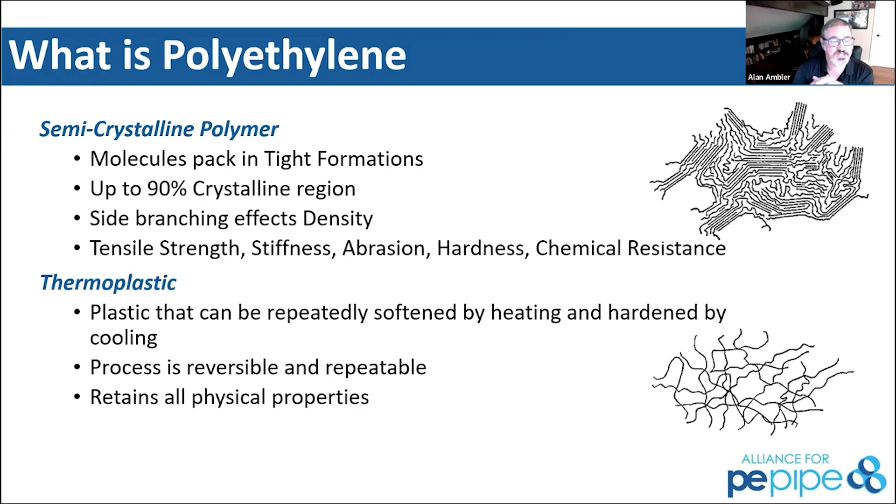What we'll see in polyethylene as this continues to go, it's kind of like chocolate. So as we continue to show you what happens, we are going to reform, melt that surface. In butt fusion, we'll push it up against and control the pressures to which we are putting those two surfaces together in that interface, allowing the molecules to run across that connection. What we're doing is allowing that integration of the polyethylene molecule to run through that connection and continue to form the bond we're looking for. That joint is exactly what we want, as strong, if not stronger, than the pipe material itself.

So what happens during this, if we fast forward through the entire animation, we'll see those two surfaces at rest. Then when we start to heat that surface up, all of those chains will disentangle and start to move across that surface. All this is hydrogen and carbons as we're moving through in polyethylene. It gets between that boundary as we continue to move across, and then as it cools, it will be as strong, if not stronger, than the pipe itself.

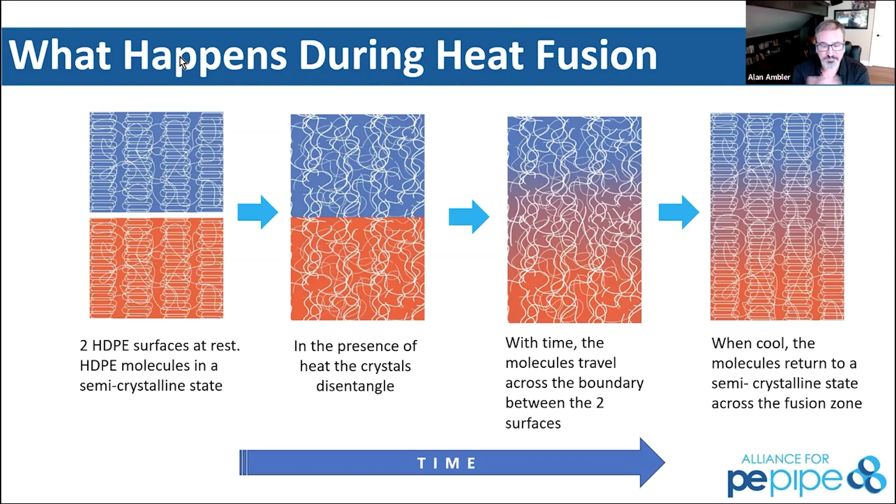So Jim, take it away. All right, thanks, Alan. That's a great overview of what we have there and how this works.

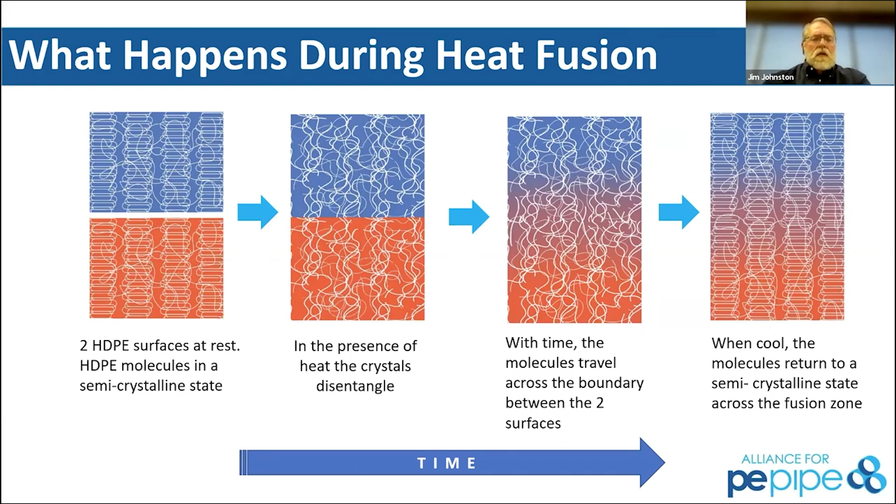Let's talk about the strength of fusion. As Alan said, the fusion process itself is melting the joint and bringing it together. In this case, we're showing the butt fusion process coming together, the molten zone bringing the two ends of the pipe together, and then reforming. Now we have a pipe that is as strong as the original pipe itself.

The steps to do a butt fusion are really fairly simple. You've got to make sure you do it right, but you clean and clamp the pipe, face the ends to establish a clean parallel surface, align the ends, melt those pipes together, push them together by applying force, and then hold them through the cooling time, very much like the chocolate analogy Alan showed. That same process can happen to a degree also with electrofusion.

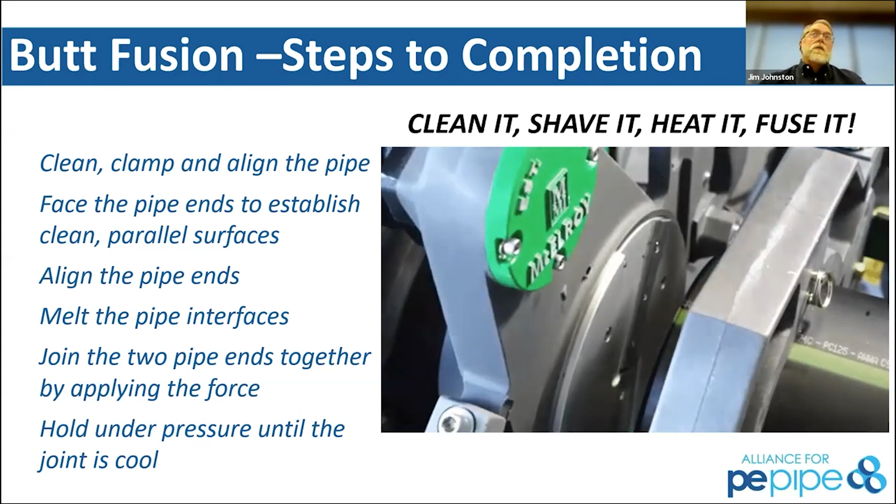And with that, I'm going to turn it over to Rick, if you'll come on and talk us through the process of electrofusion here, Rick. Can you see me there? Didn't come on? No, just do it without the video. If it doesn't work, we can hear you just fine.

Okay, obviously with electrofusion, it's going to require an electrofusion fitting. While it's a very robust fusion process, just as butt fusion is, it just utilizes a different methodology of getting there. We have to have the fitting, and clean peeled surfaces so we can get down to virgin material. The process will use the fitting to melt the pipe and the fitting. It's going to swell, creating contact at the interfacial area between the pipe surface and the fitting. It moves between the cold zones, and that's where the co-mingling of the actual molecules takes place. Then it cools down, and you have a very robust fusion joint.

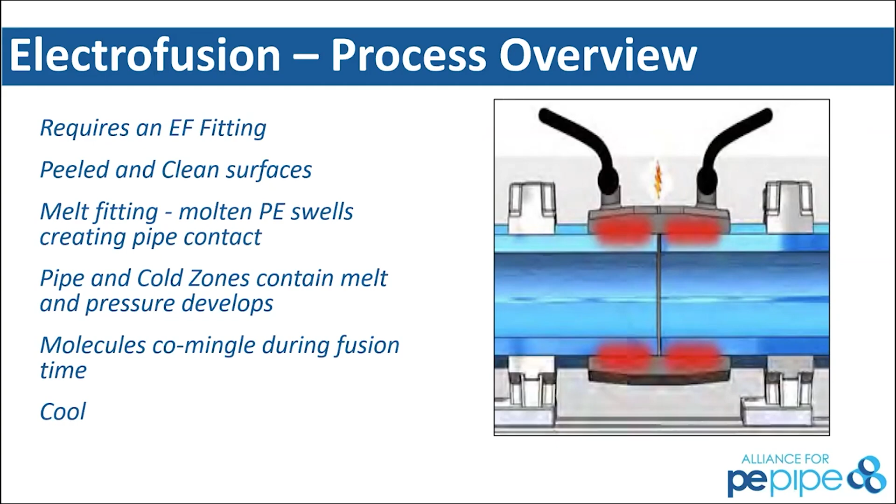We talked about doing the actual fusion. The methodology is with the electrofusion fitting. It has two areas: a fusion zone, where we have the wires, and the cold zones, where we don't have the wires. As the fusion zones heat up and begin to expand and move out to the cold zone, it dams up, builds the interfacial pressure, and then the actual fusion takes place, basically in the simplest form.

It's going to utilize an electrofusion processor, which we also call a control box. On all the electrofusion fittings, we have barcodes that allow us a universal way of inputting the fusion data. By scanning the barcode, the processor will recognize the fusion parameters that each fitting has, and put it into the process after you attach the leads and scan the barcode. We want to make sure the data on the label is confirmed with what you have on the screen. Then after you hit the start button, things are good to go.

And that's anything else there. That's it, Rick. Okay, thank you very much. You bet.

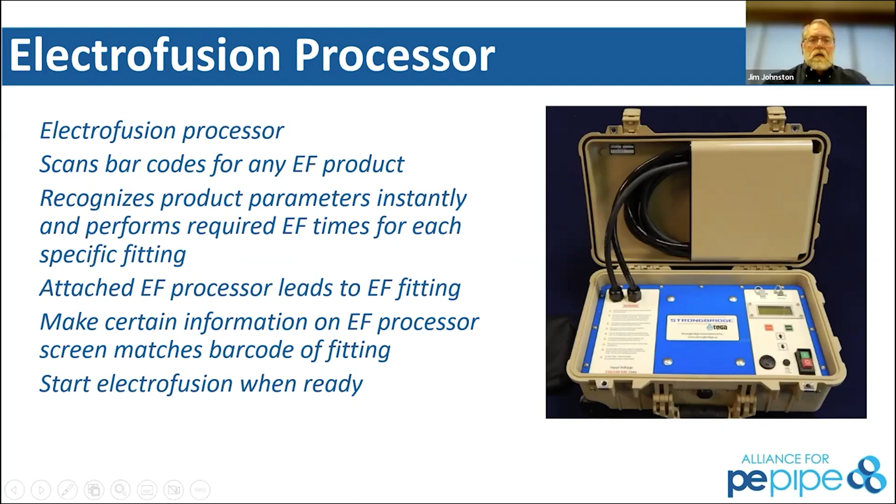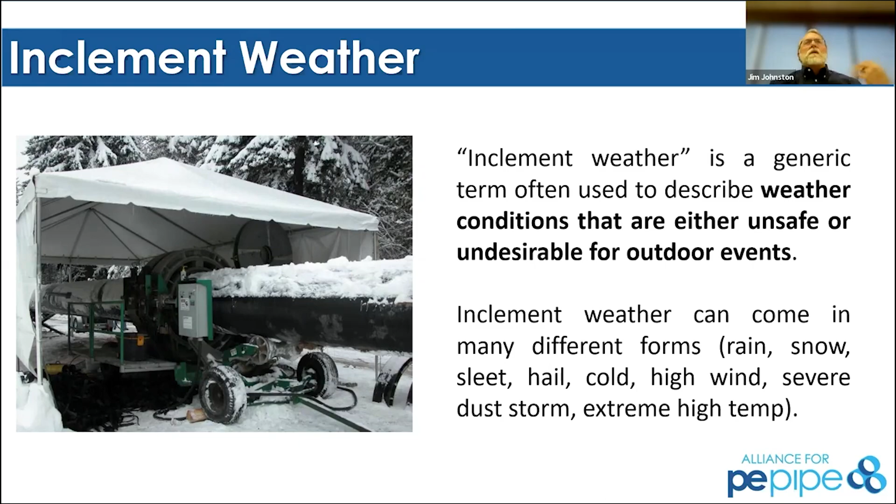With that, we're going to talk about, as the title of the presentation today is cold weather fusion, but we're going to talk about inclement weather generally. This really applies to any kind of inclement weather you may run into, situations where there could be contamination, water, other ingress into the fusion area, whether it's electrofusion or butt fusion. Doesn't matter what your process is, you shouldn't be doing any pipe fitting without some sort of protection. We're talking about generic weather conditions that are unsafe or undesirable - rain, snow, sleet, hail, high winds, extreme temperatures. We'll talk about situations in Australia this past year where we saw temperatures approaching 130 degrees plus out in the outback. Take those into account as we move forward.

With that, we always talk about safety. Chris, you've been on job sites - you want to talk a little bit about how safety impacts any job site we're talking about?

Well, okay, there's Chris. Sorry about that, forgot to unmute my mic there.

Obviously safety is going to be your number one priority on any job site. Polyethylene, when you're out there fusing it, doesn't have any other unique safety considerations compared to any other pipe. The big thing I'll tell you is in the cold, dragging and stuff like that on these job sites, you will see a lot of kinetic energy built up in this pipe. The colder it is, the stiffer it gets, and that becomes a safety aspect. Other than that, your safety priority is going to be priority number one, but at the end of it all, you're no different than any other type of pipe.

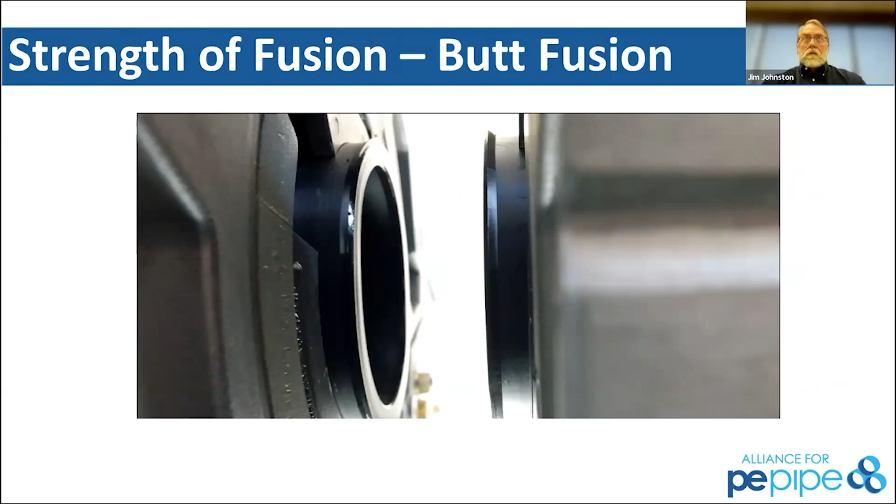Did my slides go haywire here? Yes, sir. All right, sorry, I've had a little bit of a failure. Hold a moment, please.

So Chris, you were saying that safety really doesn't matter what kind of job site you're on - whatever system you're doing, wherever you are, you should be following your safety protocols and handling that. That's even more important with cold weather. Yes, sir, the pipe is going to be a lot stiffer in cold weather. It's not going to take the impact resistance. When you're roping pipe around a corner in the wintertime, that pipe is going to carry a lot more kinetic energy throughout it because it's stiffer - it's not closer to a molten material at that point.

Chris, what are the three top ways a guy's going to get hurt on a job site with polyethylene pipe present? Loading and unloading is probably going to be the number one situation. You see more people get hurt when loading and unloading pipe. You've got to be sure first off that you're over the length of the pipe away from the end of it while loading and unloading. Second, you're not on the backside of a truck. I've seen more people in the field, drivers that aren't experienced when hauling this - they'll walk around the backside of the truck and a forklift will come in to grab a bundle of pipe, and off the backside goes a stick or two of pipe, or even a whole bundle. That's one of the biggest safety concerns out there. And when you're dragging this pipe, remember it has that stored kinetic energy in it, so when it comes around a corner, that tail, especially at the end, is going to whip out. Those are the two primary safety concerns I see in the field.

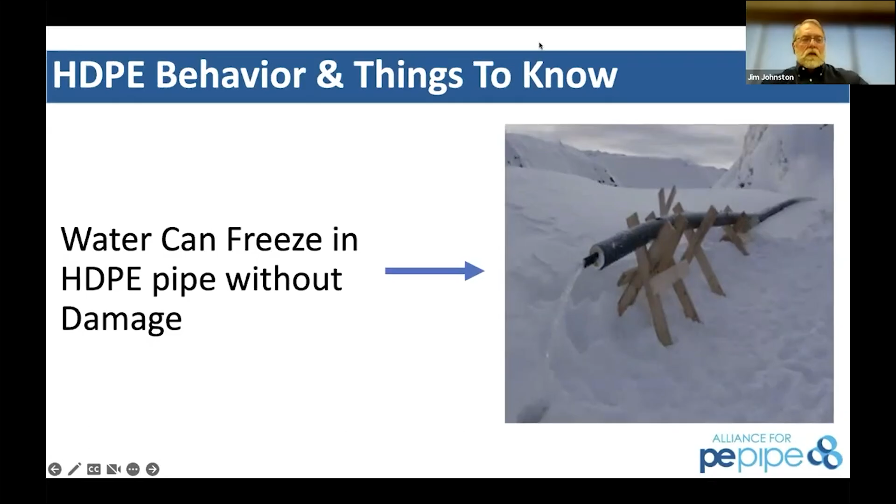Thank you. Are you seeing my slides back? Yeah, you're good. Okay, all right, sorry everybody. As we all know, technology some days is our friend and some days it's a challenge.

So as we talk about this, one of the things that's really key with polyethylene is that one of the great pieces of polyethylene and its advantages is that it can freeze solid without damage. So you've got a huge advantage here versus other entrenched materials that are out there that will just shatter as the pipe expands.

That polyethylene pipe has enough flexibility that it can freeze solid on the inside. That's a great behavioral characteristic and one of the great advantages, especially in cold weather situations. Even when the pipe isn't buried below the freeze line, it has the capability to survive that situation and do so without any damage at all.

We've also got some really good slides here. This pipe you're seeing on the line is actually insulated pipe. There's a carrier pipe in the middle where you see the water flowing, and around that is an insulation layer with another layer of polyethylene over the top. So you can have insulated pipe that keeps water flowing, not just freezing and managing that freeze, but continuing to move.

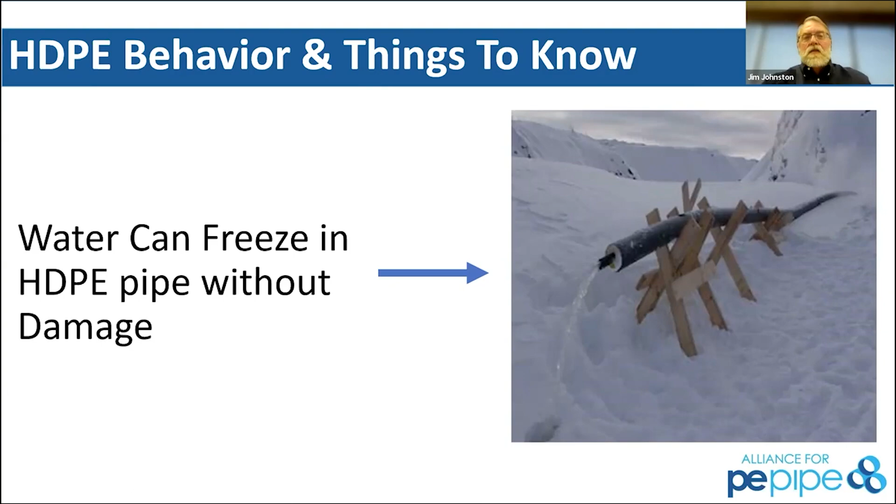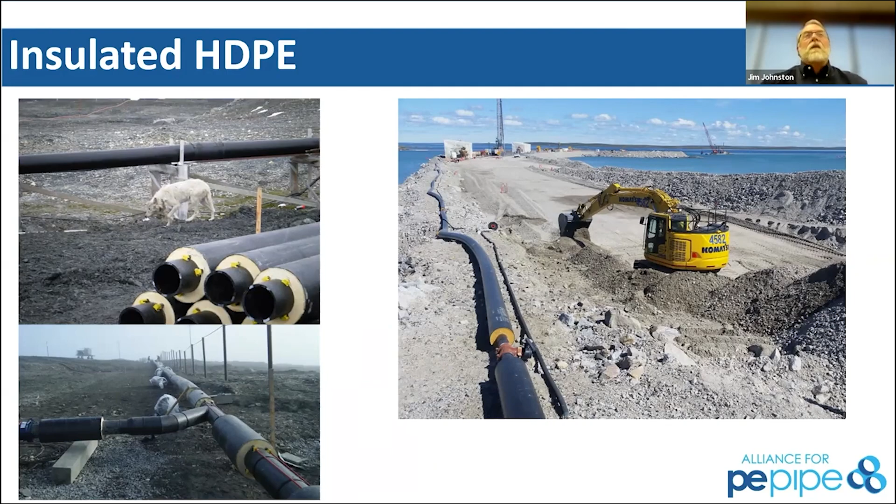Here's some other situations where you see that insulated pipe. When we join that pipe, whether by butt fusion or electrofusion, the insulation is stripped back from the end of the carrier pipe, and either electrofusion or butt fusion is done there. Then typically a wrap comes back over that exposed area to re-insulate that component, so now you have a completely insulated system throughout your process.

One of the other features you'll always see is using the tools available to help align the pipe. The beauty of polyethylene pipe systems, whether using coiled pipe or stick pipe, is you can have very long runs of pipe. You want to use pipe stands, lifts, rollers, and other components to keep that material off the ground so it doesn't get scratched, but also to help move the pipe into and out of the machine, minimizing friction.

The biggest key in this situation, with these productivity tools that McElroy offers, is setting your job site up correctly. If you set the job site up correctly and use the tools properly, the way they're intended to be used, it will increase your production, even in cold or extremely hot weather, and it will make your job site much safer. When you're out there just trying to hold up the pipe, fuse it, and drag it without using the tools properly, it makes your job site much less productive and much more unsafe than if you just took the time to set it up properly.

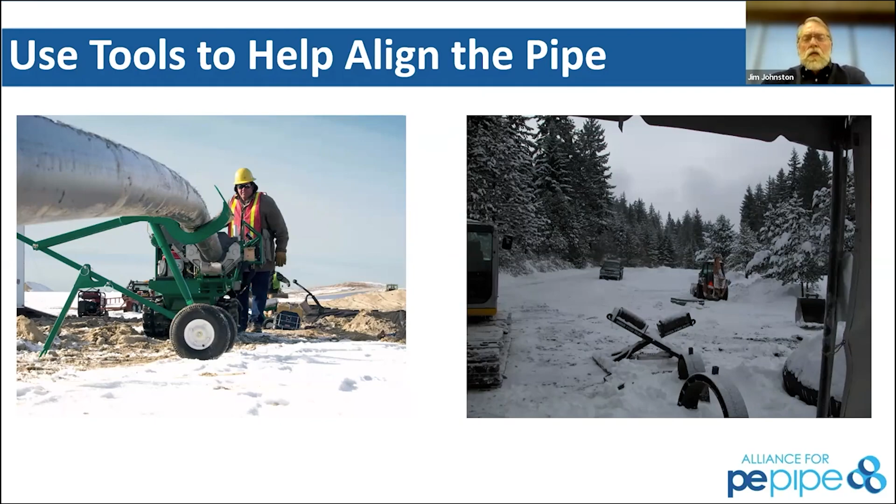So we've got a couple of examples of installations that are really great examples of cold weather applications and cold weather ultimate uses. The West Fork Upper Battle Creek diversion was a fantastic project in the state of Alaska. It was put in at the Bradley Lake Hydroelectric Dam, which covers a huge portion of southern Alaska. The reservoir feeding that hydroelectric dam was running low, and there's a glacier stream that was rerouted to continue on its current path, but at certain times be diverted to refill the reservoir.

It was 2.3 miles of 63-inch DR-17 pipe. For those not familiar, DR-17 at this diameter is roughly 3.7-inch wall thickness material. This was built literally up the side of a mountain going up a glacier. You can see the McElroy Talon going up that grade, fusing on the side of that hill up to an 18% grade. This was one of the toughest projects this machine has ever seen. This machine will do up to 2-meter diameter.

For this pipeline, the road was built, then the pipe was buried right into the side of the road, and the road was taken back out at the end of the project because it's on a national park. So, a very cold situation obviously in Alaska, but a great application for polyethylene that can be a long-term solution to maintain that hydroelectric dam in that area, and really a fantastic solution for HDPE.

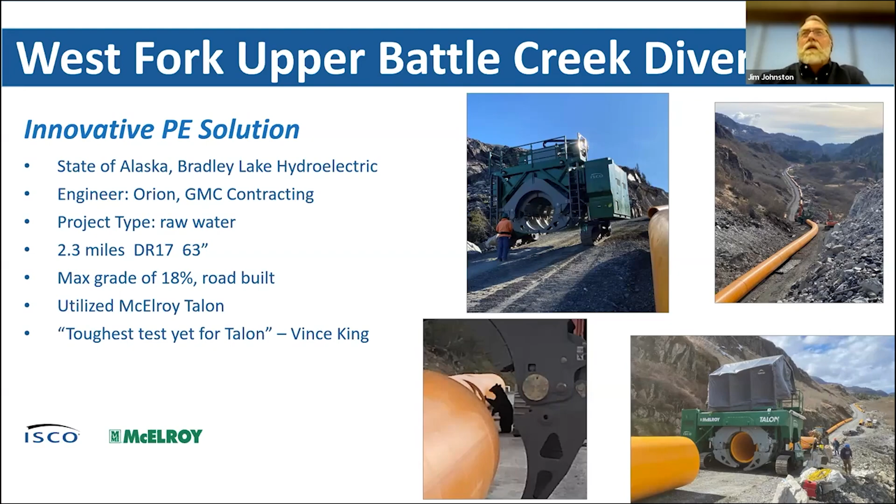And in the bottom right picture, you can see the amount of incline that goes up the hill, and the tie-in here at the bottom as they're doing sections as they go up this hill.

So Rick, if you would come back on and let's talk a little bit about normal operating temperatures. How do you process, and how do you do things? When we talk about normal operating temperatures, basically what we're talking about is the ambient operating temperatures when you're installing electrofusion fittings, where you don't have to make any changes to the standard fusion times or procedures. And electrofusion, that tends to range between 14 degrees and 114 degrees. Now, it can be fused colder, it can be fused hotter, but in those instances, we'd basically like to be called to find out what temperature range, just in the event we may need to modify fusion times or something like that.

Yeah, and on the butt fusion side, the standard basically says you should not be fusing below 5 degrees Fahrenheit. There's a lot of things that go there, and we're going to talk a little bit as we get further into this. You're going to hear me say a few times.

Chris, come on as well. Yes, sir. Me talk. Go ahead.

So to touch base on that statement that you just made, it doesn't mean that you can't fuse below 5 degrees Fahrenheit. It's not recommended to fuse below 5 degrees Fahrenheit without precautionary measures being taken. So it doesn't mean all of us up north have to shut our jobs down when it gets cold outside. So keep that in mind when Jim's talking about cold weather fusion.

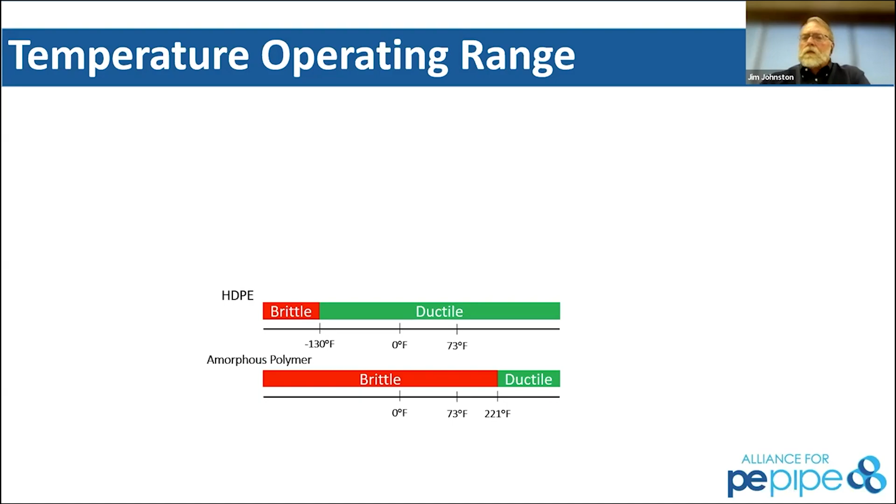Alan, if you're going to come on, talk a little bit about where we are with temperatures and operating ranges. Microphone. All right. Looks like we're having an issue with Alan.

So go ahead, Jim. The material itself, polyethylene itself, has a service temperature range ranging from -40 degrees, which is roughly -40 degrees Celsius, roughly, also to 140 degrees. That's your operating temperature for the material in process. You're going to have some applications where you're going to be hotter than that, but you're going to lower the pressure. The glass transition temperature, meaning when is this material going to fracture if I hit it, is minus 130 degrees Fahrenheit. Hopefully none of us ever have to see minus 130 degrees Fahrenheit.

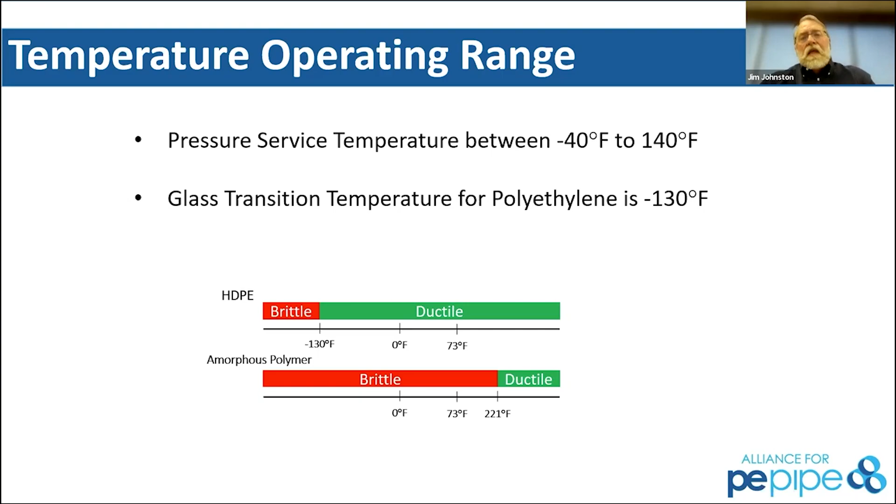But that means it's much more flexible. It has much more capability. If we were to look at some of the other amorphous polymers, which are not HDPEs, some of the other plastics that are out there, their brittle temperature, that glass transition, meaning where they become brittle to impact, happens at 220 degrees Fahrenheit. So they're brittle just sitting on the ground. So again, one of the other great advantages of using HDPE.

Thermal effects themselves, we actually see that polyethylene has a very strong thermal expansion rate. The rule of thumb is a very easy piece to use here, which is 1/10/100, meaning that it will contract or expand at a rate of 1 inch per 10 degrees Fahrenheit per 100 feet of section. Now that's unconstrained. It means if it's just laying on the ground, it will expand or contract at that 1/10/100 piece, but it takes a very much smaller force to restrain that, because the force of that expansion is much less than carbon steel or stainless.

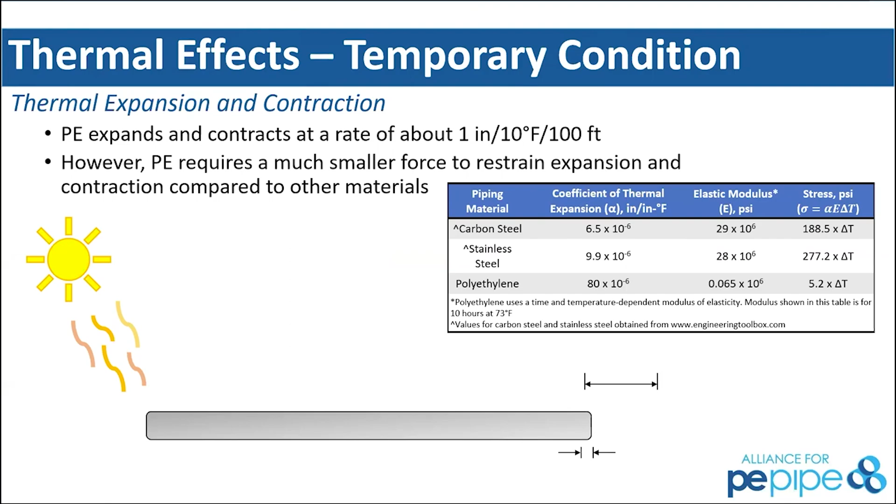If you look at the animation on that, it'll show it at the bottom. Oh, there it is, you go. Okay, sorry. So a 2-inch Schedule 40 pipe in its contraction will actually have almost 8,000 pounds of force in its contraction. However, that longer expansion in a 2-inch HDPE pipe will be 321 pounds, because the elastic modulus is so much smaller than those other materials. So your restraint requirements on those larger pieces is so much greater.

There's Alan. Do you want to add in here, Alan? Oh, yes. Sorry for that.

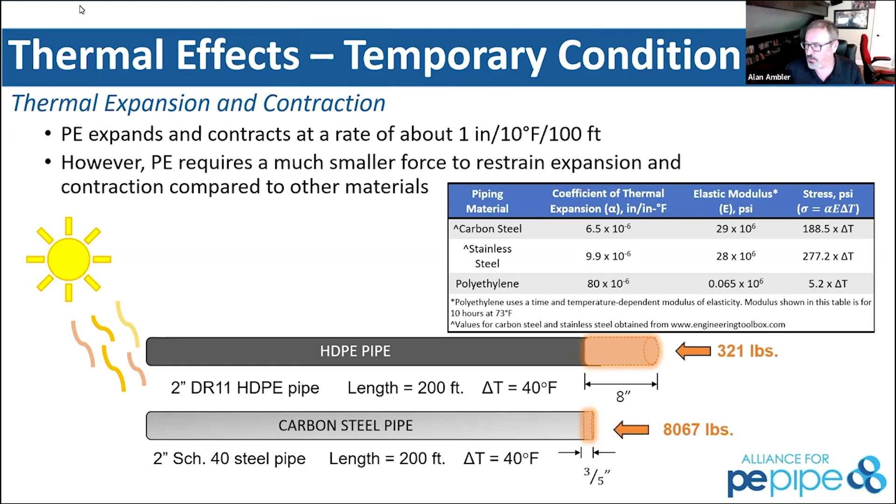One of the key things when we're looking at HDPE in a cold environment, if you want to go to the video on the next slide, it'll kind of bring a synopsis to it all here. As that pipe just gets colder, then it just requires more force to be able to manipulate it, move it, and things of that nature.

So you still have all of the behaviors that are inherent with HDPE, with durability, flexibility, and all those things. We just now need to be able to manage that pipe in the cold environment with additional force. That's it in a nutshell.

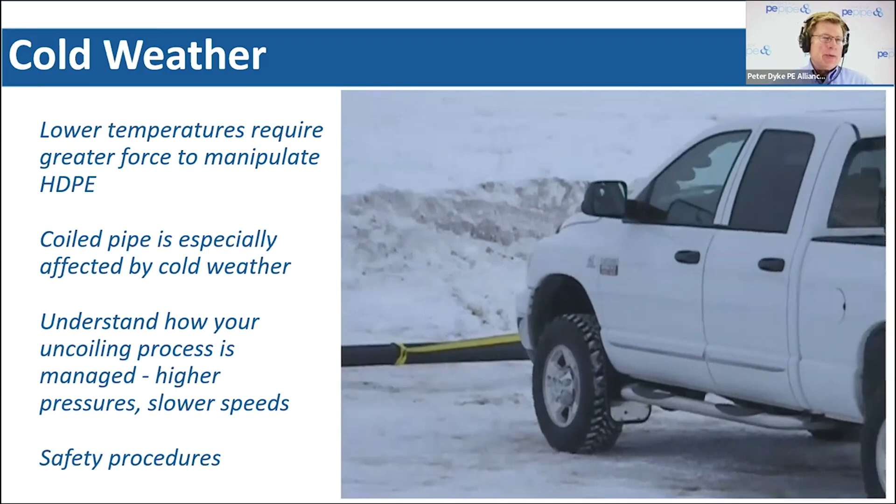So guys, if I could summarize handling polyethylene in a cold environment, I would say when it's colder, it's more pressure capable, but it's also stiffer and it's harder to handle. Would you agree?

It is harder to handle than— well, I wouldn't say it's harder to handle. You just need to know what you're dealing with and take your time. So with coiled pipe, you just need to go slower than you would if it were 80 degrees outside.

Okay, Chris, how would you characterize it? I would characterize it all like Jim there, but coiled pipe is huge, and that's where you see most of your injuries come in the polyethylene market.

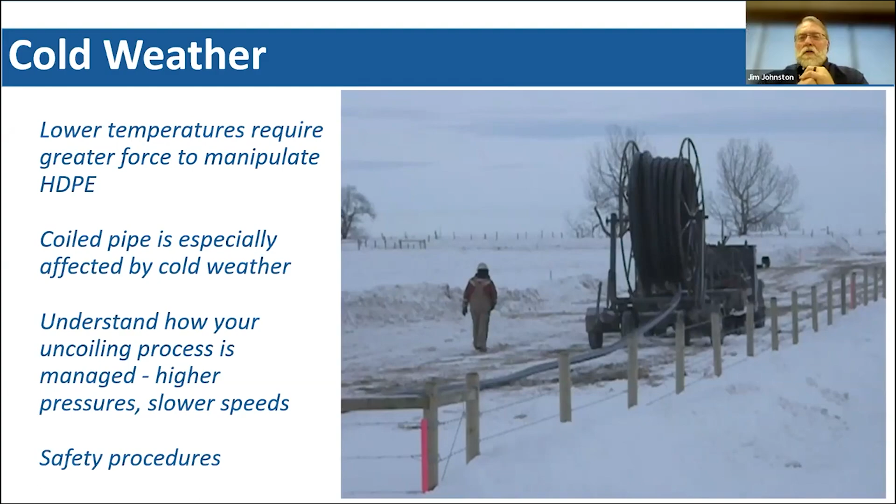I've seen guys in this prior video that you guys just played on this presentation—that guy walking along that spool-out trailer is not the smartest place to be. You would want to be in front of that trailer, because if that pipe were to by chance break, that tail's coming around. That pipe has that memory and it wants to come around and recoil itself back up. That's just like a clock spring—it's going to roll right back up.

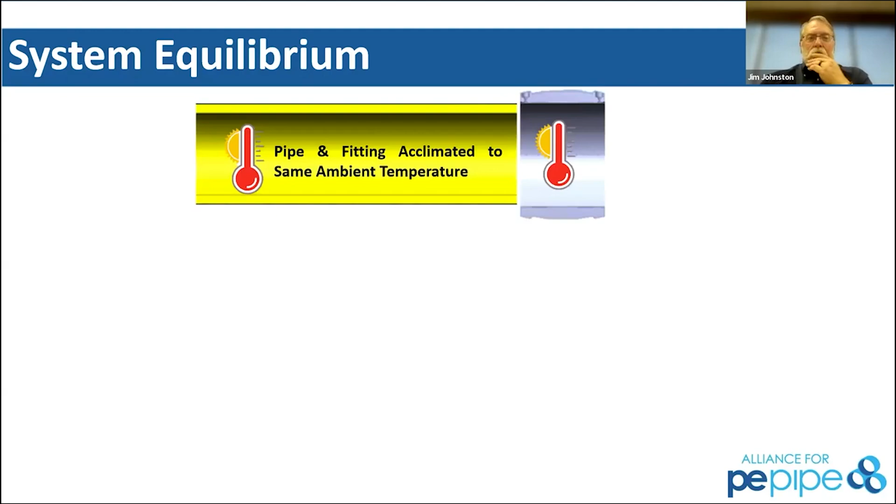Okay, Rick, do you want to come on and talk a little bit about where we are with getting to equilibrium? Yeah, since we know that temperature does have an effect on the polyethylene pipe and fittings dimensions, and we also know that electrofusion fittings are manufactured to really tight ASTM dimensional requirements, we really have to make sure that both the pipe and the fitting are acclimated to the same temperature. In other words, if both the pipe and the fitting are the same temperature, everything's going to go together fine.

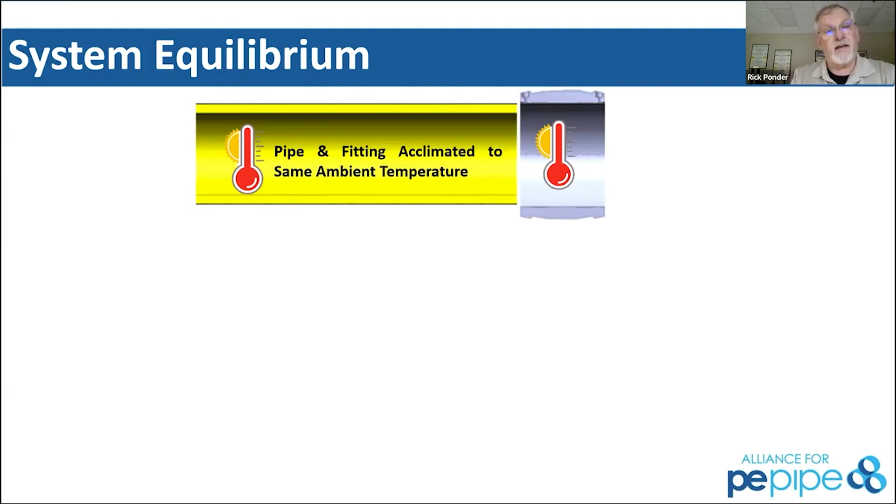The interfacial gap is not going to be too large that it can't be filled as the plastic melts and expands. When you have a pipe that's at a higher temperature and a fitting at a lower temperature, the pipe could be larger than the fitting and it may not go into the fitting easily or at all. If the pipe is colder than the fitting, then it's going to be smaller and will slip in easily, but the gap may be too large for the fitting to actually heat up and expand and close the interfacial gap like you need to do to get a good fusion.

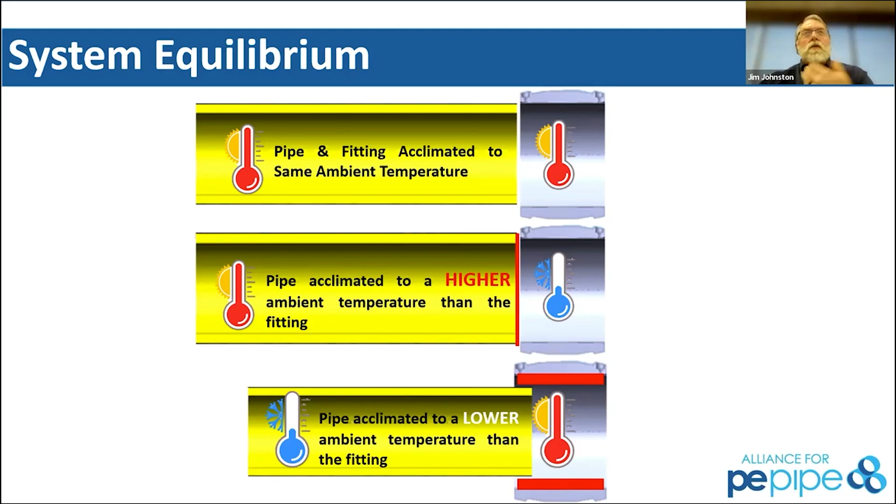Great, Rick, thank you. So there are considerations to come into this, and again, these are a little bit like the safety considerations when you're dealing with cold weather—whatever pipe system you're dealing with, you're going to have these kinds of things. So these are just the specifics that we need to know.

Relative to the equipment on the butt fusion side, you've got hydraulics that are involved here, and cold weather temperatures affect hydraulics. You need to make sure that you're choosing the appropriate hydraulic fluid for the application that you've got. If you're in a very, very cold situation and you're using a high temperature hydraulic fluid, it can get really maple syrupy, and that changes your characteristics and affects your pump. It does a lot of other things. So you want to make sure that your equipment is set up to maintain that.

As you look at the chart, this comes from our McElroy recommended hydraulic fluid. There's a pretty broad range of operating temperatures for hydraulic fluids, but if you are working above the Arctic Circle, you're going to have some specifics where you want to be really close with that.

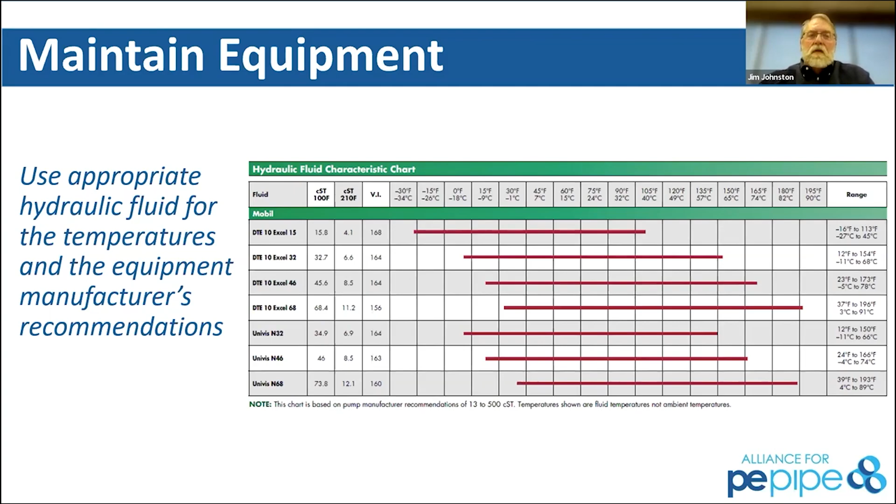Chris, I think you even have some situations sometime in Wyoming where it can get pretty darn cold up there. Absolutely, and making sure that you have the proper hydraulic fluid in your equipment based off of your temperature is huge. I've had machines come up that we've shipped—obviously we have locations all over the United States, but you ship them up from down south and they've got

that molasses type hydraulic oil in there, and you fire it up here and it starts blowing oil coolers out or blowing hoses because it'll back pressure that system, because it's like pumping honey. So be sure that you're really selecting the right oil and checking all of that before you fire that machine up and tear things up.

Yeah, and that's the same for the generators as well, right? Yeah, absolutely.

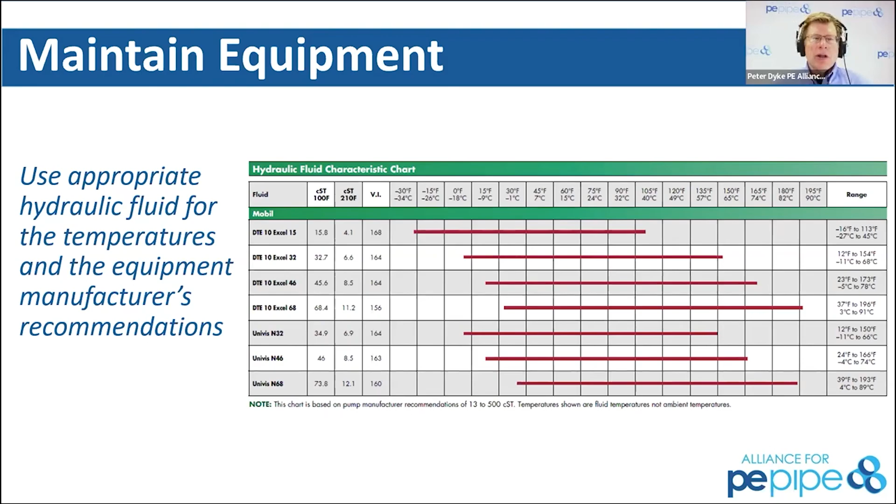So Chris, while Jim goes to the next slide, how long does it take if I've got a McElroy fusion machine out in the cold and I bring it inside a tent? How long does it take that hydraulic fluid to warm up so I can safely operate that machine? It's really going to be based on ambient temperature and what your conditions are inside the tent. But think about this: their hydraulic tanks are all iron, so you can put a heater on that iron tank and the surface will feel warm. It's no different than boiling water - you touch the pan and it's hot, but the material inside takes longer to heat up. So on all McElroy fusion equipment, generally speaking, they have a temperature gauge on that hydraulic tank. Make sure that's in the operating range temperature-wise before you fire the machine up.

Right, so generators, same situation. You've got cold weather, altitudes, other components. You want to make sure they have the right hydraulic fluid in them, but they're also going to be affected - the output voltage is going to be affected by that temperature and their ability to run. So we got to be careful with that, whether it's electrofusion, an electric only fusion machine, or butt fusion machine. Yeah, so remember, temperature derates your generator - it's not going to perform at its peak. I see a lot of guys and gals that will go look at a generator and it says it's 7,500 watts. They think that's what my power requirement is, but they're not reading the fine print about elevation changes and how it derates, and that's peak wattage when it fires up. So we want to be sure we're taking care of that.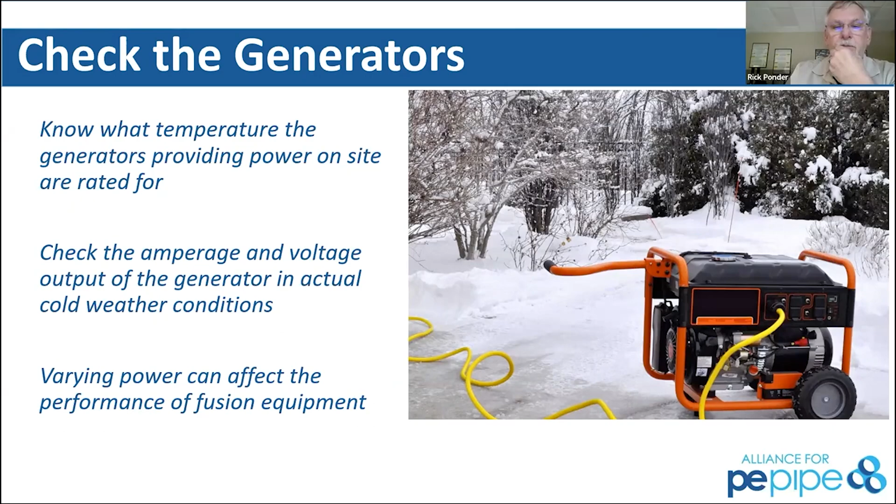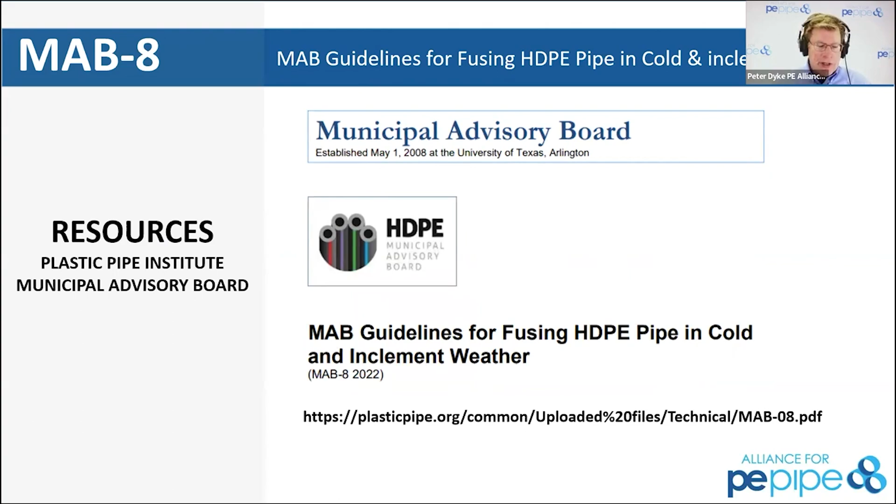All right, I'm going to take the next couple of slides here, fellas. For our audience, we've got half an hour left and some of the best content to come. We're very thankful for ASTM and the Plastics Pipe Institute for giving us a lot of guidance. In fact, PPI produced last year a cold weather technical note, an MAB document - MAB number 08. The Municipal Advisory Board is a subset of the Plastics Pipe Institute, specifically their municipal and industrial division, managed by the preeminent Camille Rubeiz, who does a fantastic job. Anyway, we got the idea for doing this deck because of this great document, and they set out about 10 different things that are good to know, really basic stuff.

Hey, if you're going to do a fusion, remove the snow and ice from the fusion zone. Don't drop the pipe, duh. But the reason I say it's a little harder to manage is because it's cold - you've got gloves on, your machinery doesn't operate as well as you may expect. Using enclosures - we talk about, yeah, let's fuse at 0 degrees, but guess what, every experienced individual doing fusion operations below 32 either has a tent or wishes they had one. In fact, the MAB came out and said - correct me if I'm wrong, Jim - they said we don't really want you fusing under 32F or 0C unless you've taken the necessary precautions that we will spend time on.

Also, other key elements are: shield the fusion area with a shelter or a tent, make sure the ID and OD have no moisture. A lot of people who like to hate on us say, oh, you've got to have a dry fusion zone - we can just put our pipe together when it's cold and wet. You're right, but do you want a joint that's going to last hundreds of years? Then go with polyethylene. Then there's this whole thing I can't wait to hear Chris and Jim talk about - preheating the pipe, whether you use forced air or heating blankets. I've seen that a couple times in the field, but those guys know a whole lot more about it than I do.

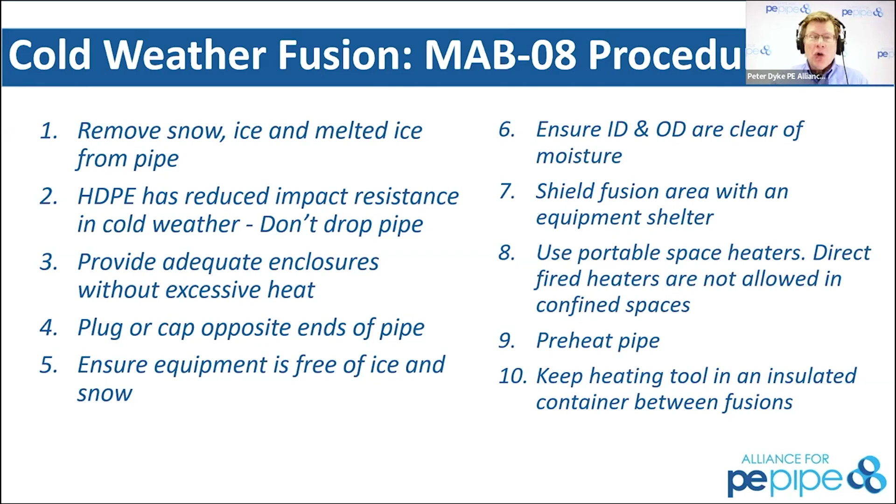We've established with this team some golden rules. The first golden rule is be patient. Accept the fact that it's cold, that the weather isn't any good, and that you've decided to do fusion even though it's raining, cold, foggy, or sleeting.

This is the one I love. When I was taking my fusion classes from Jim and his colleagues at McElroy down in Tulsa, they said to me: change the conditions, not the procedure. Jim, tell us about that.

The standard procedure out there is ASTM F2620. It prescribes all the components and functions you do - heat times, pressures, all of those pieces - and those don't change with the temperature. So what you want to do is make sure you change your conditions so that you can still follow that procedure. We're not going to change the procedure, not do anything different, not crank up heater temperatures. We're going to follow that procedure, but make sure all of the materials work the way they're supposed to work.

That's why I'm so glad at the beginning you talked about what the procedures were - clean it, shave it, heat it, fuse it. And Rick, on electrofusion, those are the basics. So whether there's snow or wind, doesn't matter, we're going to stick to the same procedure.

I see a lot of guys mess up on the 'change the conditions, not the procedure' rule. Hundreds of times I've had guys come back and say, oh, we cranked the heater up to 500 degrees just because it helps heat it faster when the pipe's cold. That is the biggest no-no you can do out there - it changes the properties of the HDPE. So keep that in mind: make sure you are changing the conditions and not the procedure. It is huge and it will affect your job tremendously.

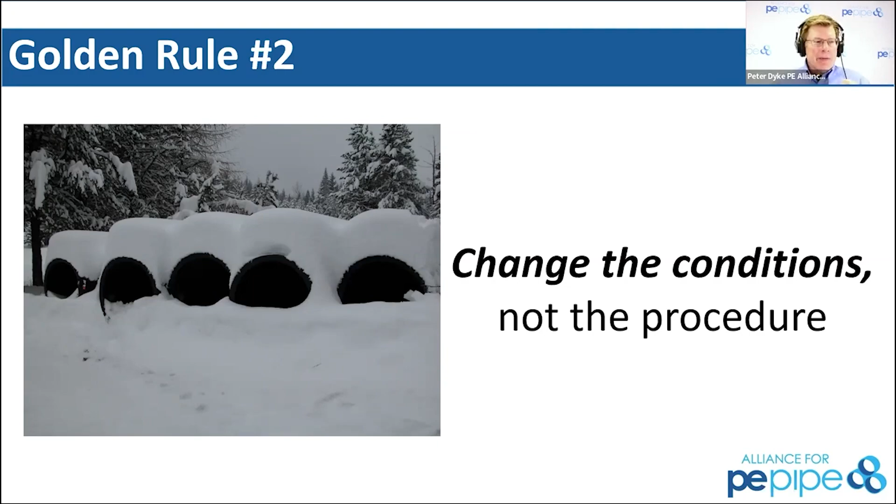And the next slide, Jim - I don't recall ever seeing this in a procedure - how far back do I have to clean off the moisture or snow from the point at which I'm doing facing operations? My short answer is you want to clean back past, or at least equivalent to, the first jaw. But you want to be several inches away from the face-off zone, so that if there's moisture inside or on top of the pipe, it doesn't follow or leak down the pipe and come back into the situation. Good practice is to clean the whole section that's going in the machine.

Chris, you want to add anything? Anything that comes in contact with the machine, you want to clean that snow, ice, and dirt off of. Not only does that keep your serrations clean, it grips your pipe better, especially as the pipe is contracting in the cold - the jaws have to close down just a little bit more to hold it in there. So anything in contact with the machine, I recommend cleaning off and having a nice clean surface.

So you're going past the second jaw, Chris? Absolutely, I'm going all the way outside the fusion machine - some of these may be 4 feet, some may be 2 - that way you're not getting any contamination on the machine that gets pulled in with the next joint.

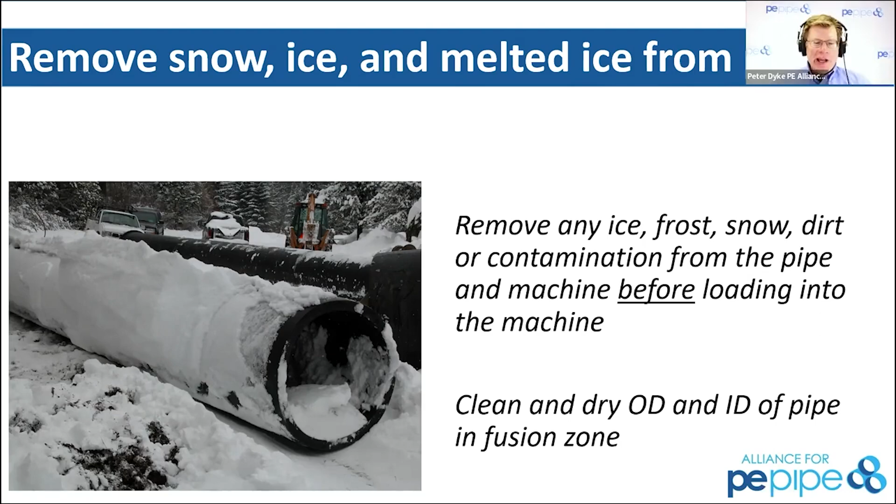So this next slide - I mean, I love this one - inspect the pipe for damage.

Okay, good. Inspect it. Cut out any compromised areas. The cool thing is with that jagged edge there, you can cut that out. If it's greater than 10% of the pipe wall, you cut it out, face, and fuse.

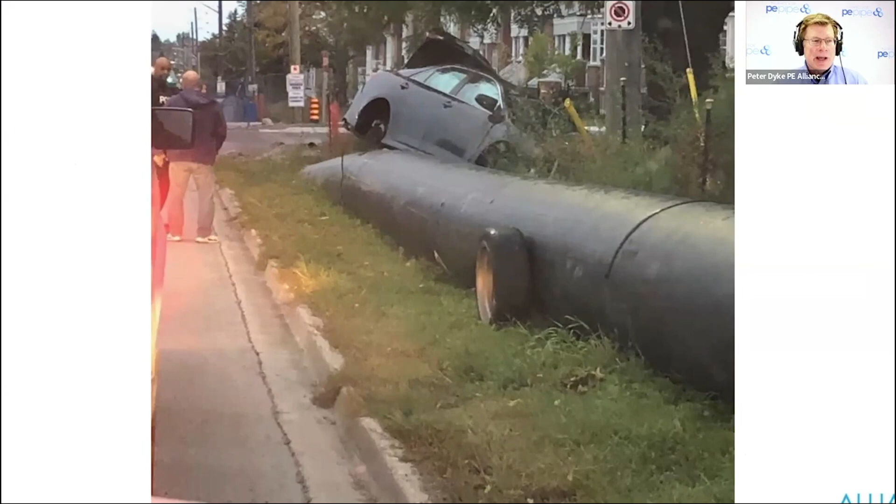This next image I got from Richard Kalasa. That guy ended up getting a drunk driving ticket. You see his tire there on the polyethylene pipe. And in fact, that polyethylene pipe was not damaged.

But you had to inspect it to make sure that it was not damaged. So we also say, hey, don't drop the pipe, particularly when it's cold. You want to place your polyethylene pipe. We can't say for certain that the pipe isn't going to get damaged if you drop it from a height when it's super cold.

In fact, Richard Kalasa tells a story about a horizontal directional drill he did, where a car hit his pipe. They pulled it in, and of course they found a crack right at the apex of the drill at the bottom. It was 40 degrees below zero when that car impacted that pipe. So you can damage the polyethylene pipe.

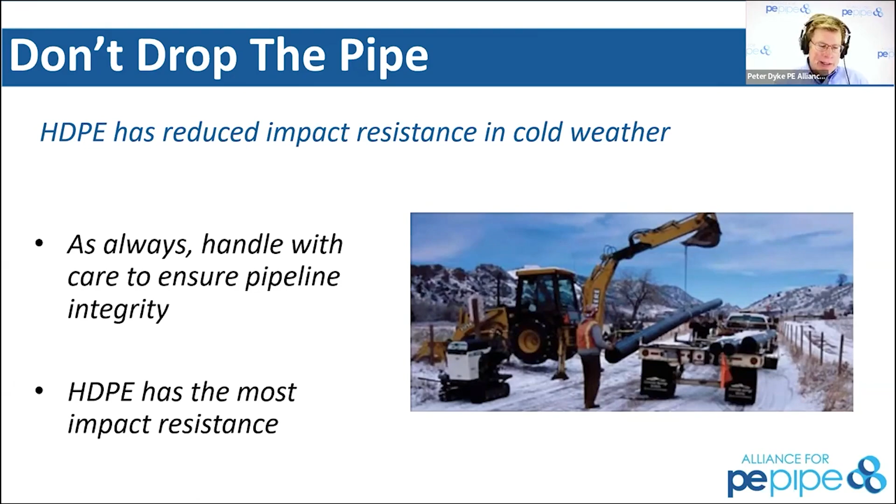So we do like to talk about protecting that fusion zone. A great way to do it is use a structure, a 20-foot or a 40-foot trailer, or buy a tent and get sides on it. But don't use excessive heat, whether it's a blanket or forced air. We have a guideline for how much heat you can use.

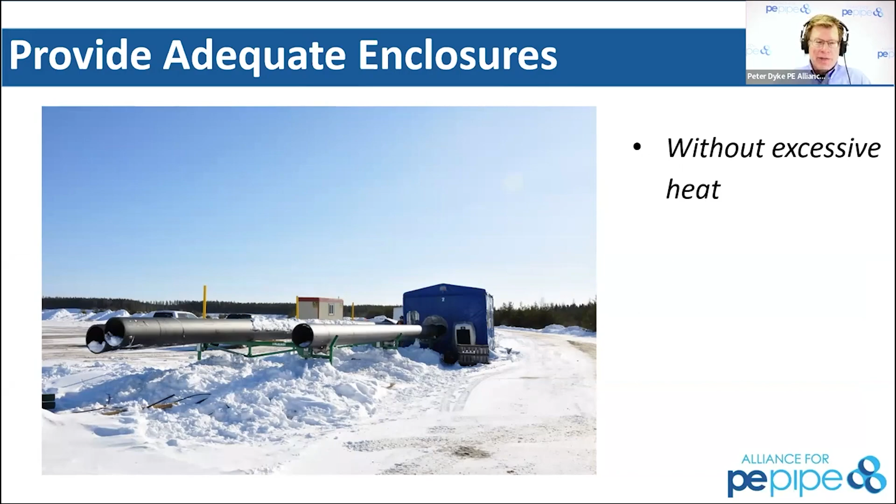I love this next one because we talk about shielding the fusion zone. Chris Waite talks about productivity tools, and here are two great ones. One, we have the Quick Camp, which is McElroy's version of a tent.

Jim, what's the specific brand name of the product on the previous slide on the right that holds that polyethylene pipe? Yeah, that is the Polyhorse, that big rack that feeds into the Quick Camp. It's called the Polyhorse.

So that's like one guy, once he gets it loaded, can do all that? Absolutely, yes. There are powered rollers on the front edge of that, so an entire bundle of pipe can be stacked and set, and you've just got a system that feeds directly into the machine using a powered roller. So one person can do that. You eliminate a lot of material handling on the job site by just bringing in those full bundles and stringing that pipe out.

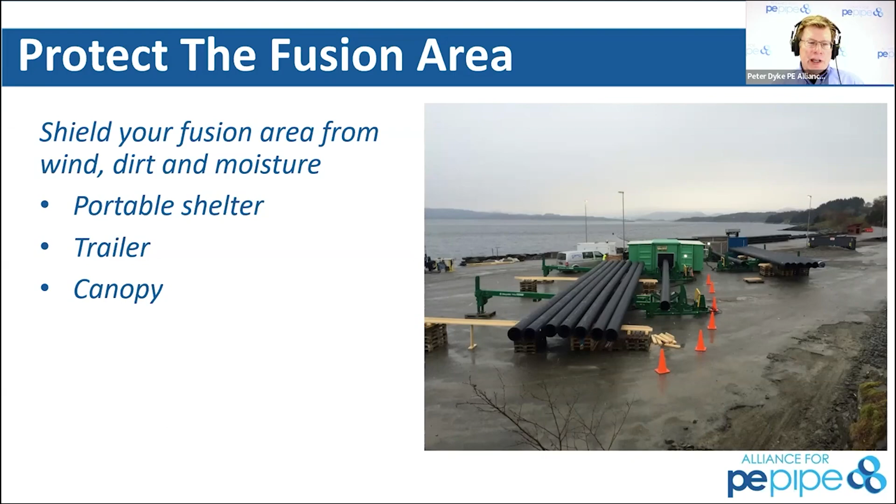Now we're up to Alberta. Who wants to handle telling this Alberta story? Jim, why don't you take it? Yeah, I can take it.

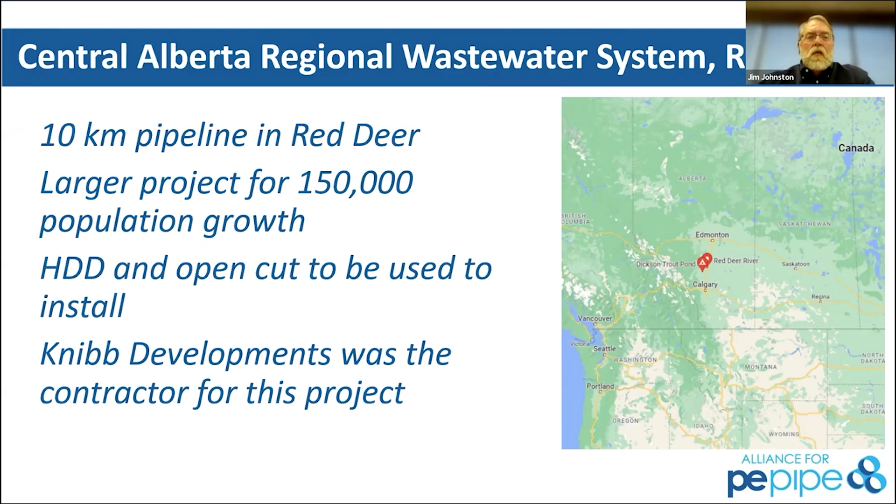So this was a wastewater system up in Alberta, Canada. It was 10 kilometers long, supporting a wastewater system for a very large population growth up in that area. It was horizontal directional drill and open cut. Knibb Developments was the primary contractor on that.

They had previously tried to use just tents, but they found that in their conditions they were having troubles with just tents. They ended up buying a Quick Camp system with Polyhorse, that big rack system, giving them the ability to set and load all of this piping into their system very quickly and easily. The inside of this container is temperature controlled, so the operator was able to do this in a temperature controlled environment, controlling not only the fusion process, but also protecting the operator.

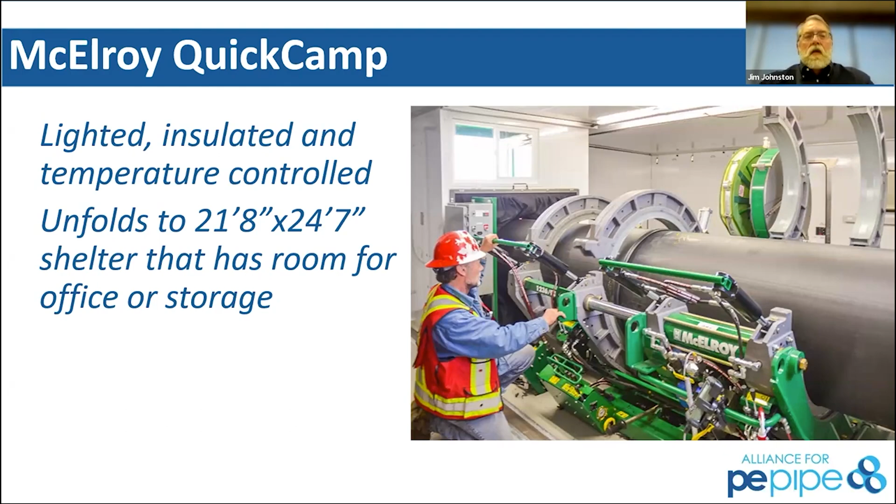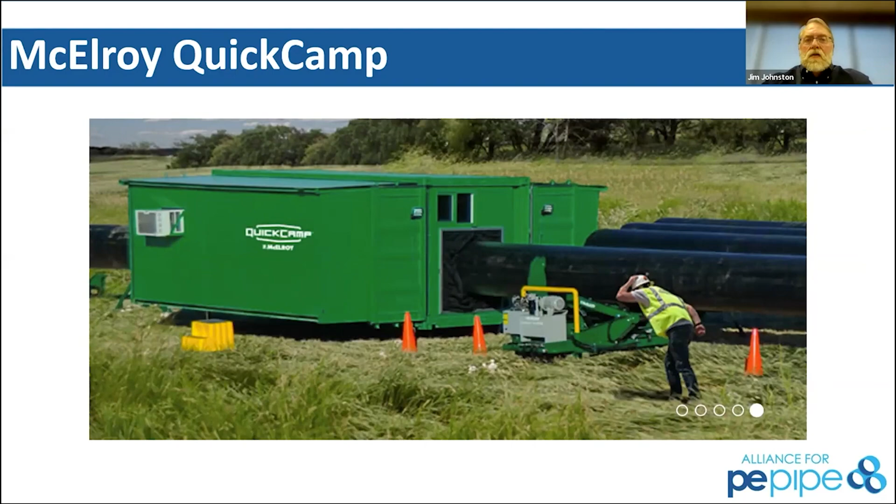Remember, if your operator's not able to perform at minus 40 degrees, even above and beyond what we're talking about with the equipment, you want to protect your operator. In this case, this container opens up and actually has space for office or storage, and really drove home a great opportunity for them. They finished that job well ahead of schedule because they were able to protect the operation, protect the operator, and actually run 24 hours a day through that process.

Keep in mind, when capping the end of the pipe, you want to cap it when it gets to the job site. Don't wait until the day you're going to fuse it, because by then it's already full of ice, snow, and critters hiding from the cold. So as that pipe's showing up, stick your bag over the end or whatever you're going to use. Do that when the pipe shows up on location, because when it comes from the factory it's as clean as it's going to get inside. And the last thing you want is a skunk squirting in the middle of your pipe during a fusion - that'll ruin your day.

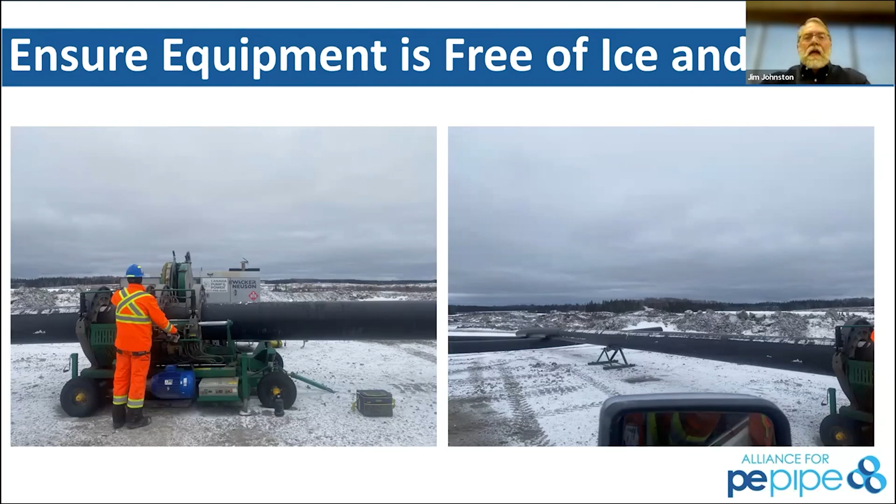Thank you for that. So we talked about one of the ongoing steps here, which is ensuring that equipment is free of ice and snow. This is also that dirt aspect. So when we talk about inclement weather, don't let snow, ice, moisture, water, or dirt get on your machine. Clean it up as much as you can, because when I finish this fusion and pull that pipe through, I'm dragging snow and ice all the way through there.

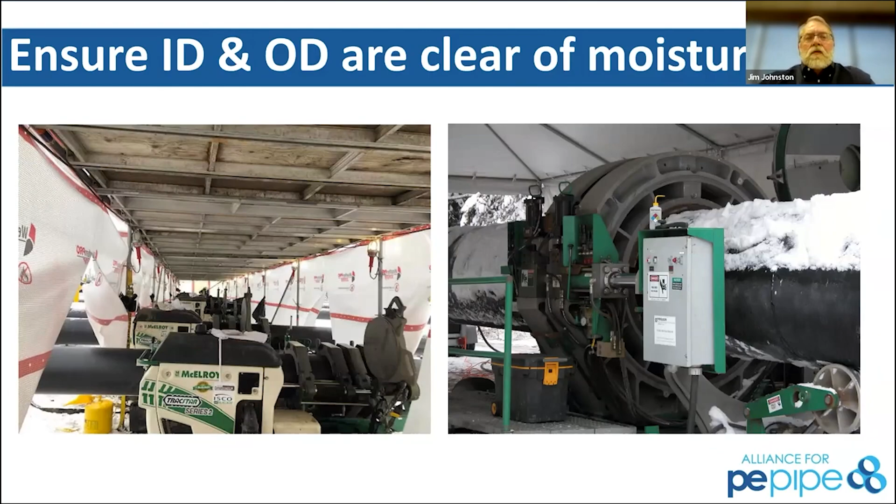Ensure that the ID and OD of the pipe are clear of moisture. That's not just visible snow, but moisture - you don't want that water getting into the joint, either in the ID or the OD. It's a simple process - just clean it off before you put it into the machine and make sure you've got good, clean capabilities. So use portable heaters, and there are a ton of choices out there.

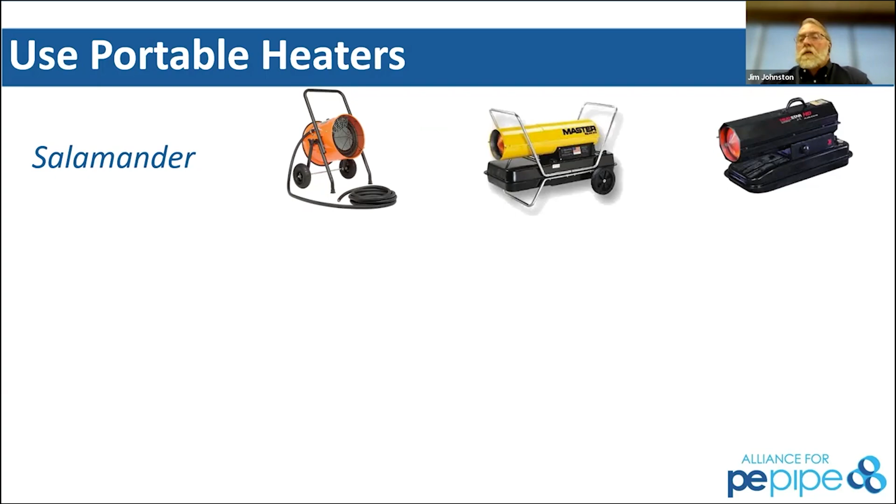You might talk about some of the heaters you've seen out in the field. We want to make sure you're using either indirect heat - if you're using a flamed heater, you don't want to put flame on polyethylene. But salamanders are one of the big ones we see used quite a bit, and can use indirect heat off of that through a venting system or a tube to run over into the pipe, onto the pipe, or into the tent to maintain that temperature and raise the temperature inside the heating zone.

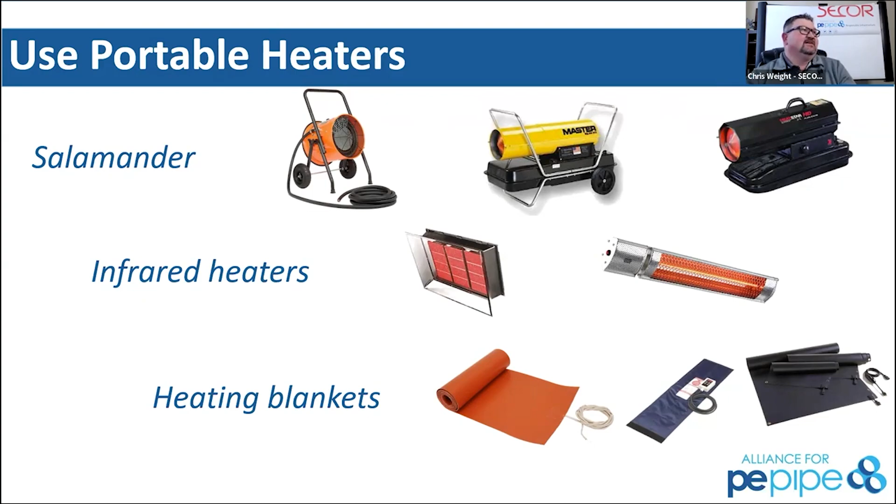The biggest ones I see out there, you get into infrared heaters, salamanders are great, and they make flameless rig heaters. The flameless rig heaters are probably the best because they put off the most heat - you can heat it up quicker. With tenting the end of the bundles of pipe, you can get that stuff up to temperature in a nice fusion range a lot quicker. Some of the heating blankets and stuff like that take a lot of time, because once you wrap it on there the thermostat kicks in. Those are great for electrofusion, but I don't necessarily recommend them for butt fusion when you're out there, because they're time suckers at that point.

So one of the options as we get into this is to preheat that pipe. As talked about for electrofusion, where you want stability of pipe, you want to make sure you're bringing this pipe up against a heater that's 450 degrees, but you don't want a huge shock to that heater, because you're still trying to melt the ends of that pipe. So it helps to preheat that pipe - try to do that in an insulated area. We see a lot of pipe being maintained in a tent by itself. You don't want to heat it to greater than 120 degrees, because you're starting to get into zones where you don't want to mess with the sag of the pipe or other components. And use multiple heaters where you can.

Reels and stick pipes can be tented with tarps and heated with warm air from an indirect fired heater, as Chris was talking about. You can have that prepped and ready. It helps your pipe be cleaner before it goes into the machine. So there's a lot of things you can have on site ready to go.

So Jim, 30% of the folks on the call today consider themselves advanced. Where does heating, preheating, and cold weather operations play with the whole McElroy accelerated cooling, optimized cooling?

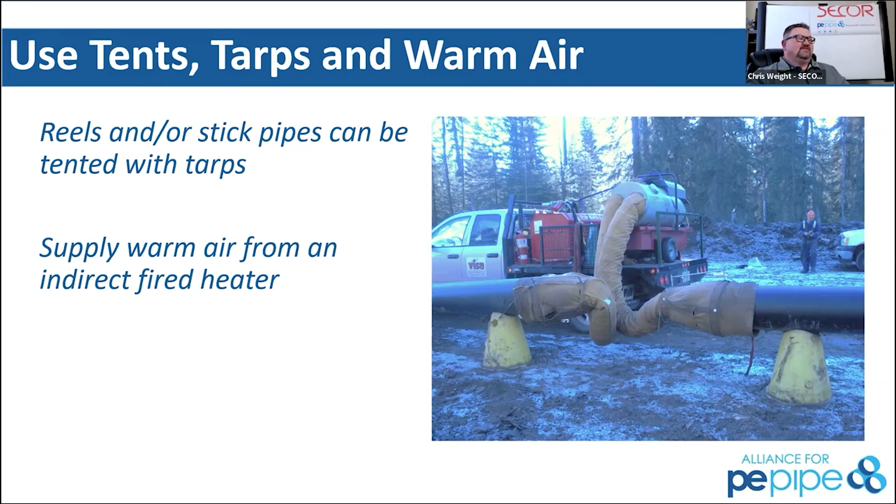So we have a guy who just asked a great question. He goes, okay cold, what about hot? He's seen pipe as hot as 200 F. We're not supposed to preheat above 120. So what is he supposed to do when the pipe already starts super hot?

When it starts super hot, in those cases, you want to have some protection there. Black pipe is going to be a black body that absorbs heat. Your best choice is to try and protect that with a tarp or other things. But it is not one of those where you can't preheat, it's not a prohibition to have the pipe greater than 120 degrees. It's just a best practice to not try and go any hotter than that in the cold weather situation.

And we've seen 160, 170 in heat in sun-loaded pipe. I've never seen 200, that's pretty extreme, and that is going to extend your cool time quite a bit, because you're getting close to a point where, from your cooling standpoint and your ability to handle that pipe, you're going to have to slow down and really allow that pipe to cool for a long time, or protect that joint to allow it to cool for a long time.

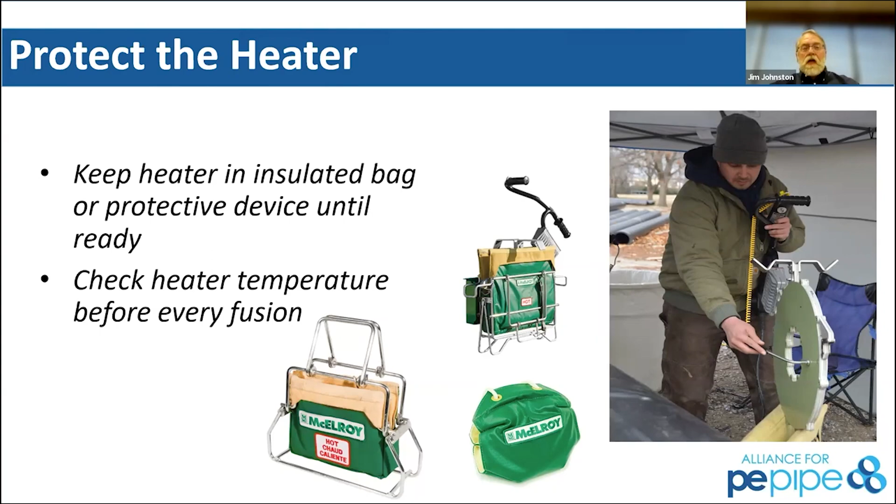Don't drop the pipe. Provide adequate enclosures. This is good for you, good for the operator, good for the process. We want to make sure that we have the capabilities to protect that fusion process, electrofusion or butt fusion. Make sure it's clean, it's dry, it's protecting the operator.

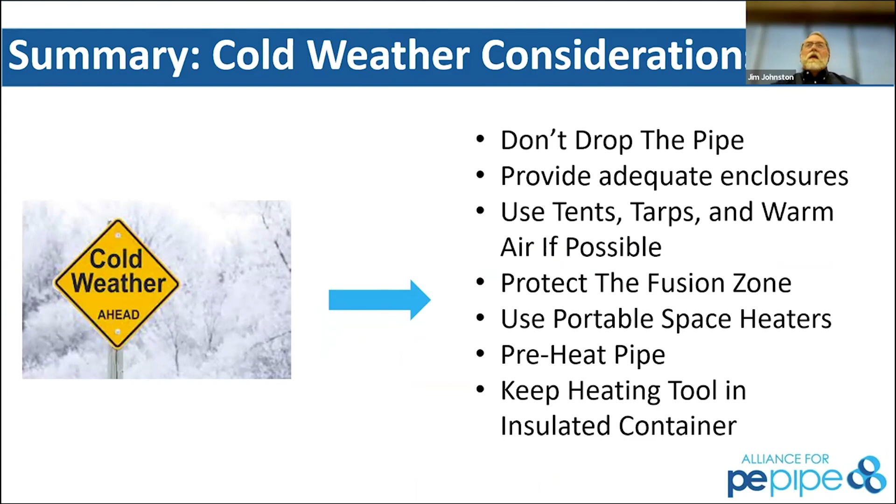Use tents and warm air wherever possible. Protect the fusion zone, use space heaters where you can. Preheat the pipe where you can. Keep the heating tool in an insulated container.

Understand your thermal effects, that could be cold, that could be hot, just like we talked about. You're going to have pieces there, so just know your extremes. When we're talking about these, we are talking about extremes on these sides.

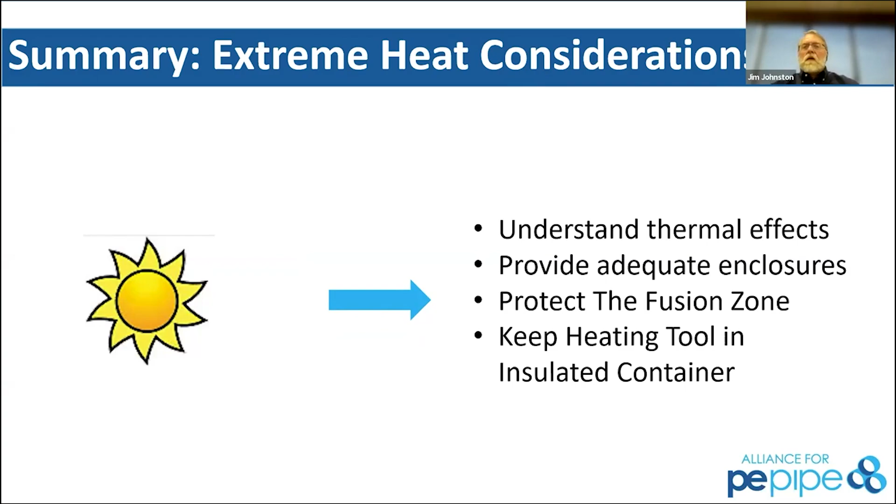Provide the enclosures, protect the fusion zone, keep it in the heating container. In windy situations, cap the pipes, protect the fusion zone, provide enclosures, keep the heater in an insulated container. These are all pretty rote, over and over pieces.

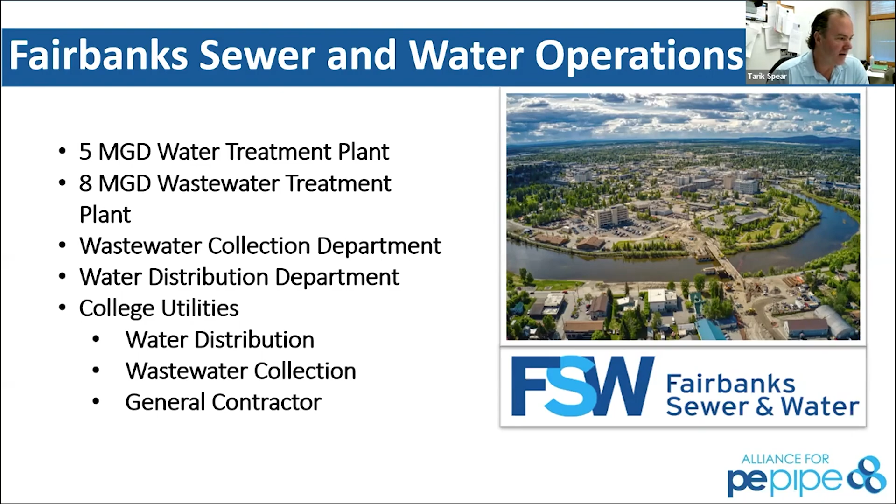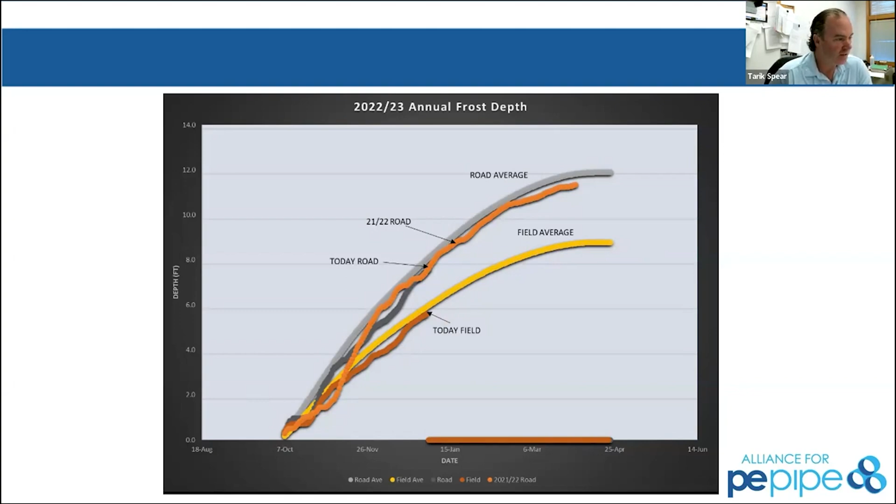So permafrost. Alaska is known for permafrost. It's ground that's permanently frozen, very difficult for construction. I've seen water mains installed in this permafrost, and years later they'll be installed at 4.5, 5 feet deep, and we'll find them at 13 feet deep. They just settle out of sight as it melts.

We've discovered directional boring of insulated jacketed pipe works real good because you don't disturb that upper layer. It tends to have a lot of heat built into it, and that helps protect the pipe, reducing the speed in which the ground thaws around it.

Insulating costs, all of our system, most all of our system has some form of insulation on it, depending on pipe size and thickness of material. This cost ranges from $10 to $25 a foot. I've been doing a lot of experimenting and testing on HDPE versus ductile, and in the thermal loss tests, I'm finding I'm using 10-inch HDPE SDR11 and 8-inch ductile, which tend to have about the most similar inside diameter and carrying capacity.

Our typical construction standard for ductile is 2 inches of polyurethane foam. With the HDPE, I'm able to get the same or better thermal heat retention with half of the insulation. It's pretty exciting for us because insulation is a big cost, a big budget item when we're designing our capital and our projects.

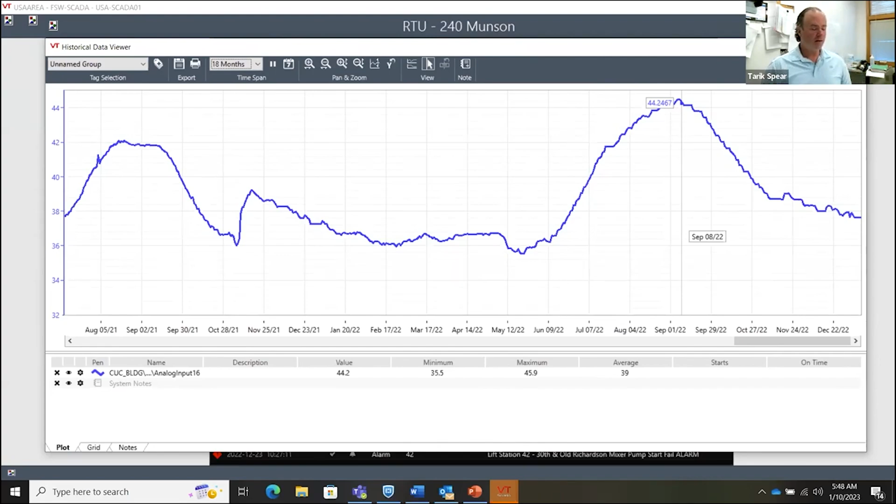Most circ loops circulate from 100 GPM to 1500 GPM, depending on the volume of water. Corrosion - 4 out of 5 of the leaks we have in our system are corrosion holes, typically in a pipe called 10 gauge. We have a lot of that. The other 1 out of 5 typically is in copper service lines.

So material handling costs - this project here was a 36,000 foot water expansion project, using the 4-inch SDR 11 insulated, jacketed with that jacketing Jim mentioned. We had that whole 36,000 feet show up on 4 tractor trailers. If that had been ductile, we'd have had material come from the manufacturer to a port, barged from the port to Alaska, transported from that port to our insulator, insulated, and then transferred to the job site. This all showed up pre-insulated, jacketed, caps on the end, offloaded, and went to work.

So Tarik, you mentioned insulated pipe - do you use heat tracing on your insulation?

Some contracts require heat tape, right? Yeah, we've done some force mains where there's a little channel installed and heat tape will be pulled through. But long-term, our experience with heat tape is it's good for a certain period of time and then it quits working. So I'm interested in learning more about some of the better methods and materials out there.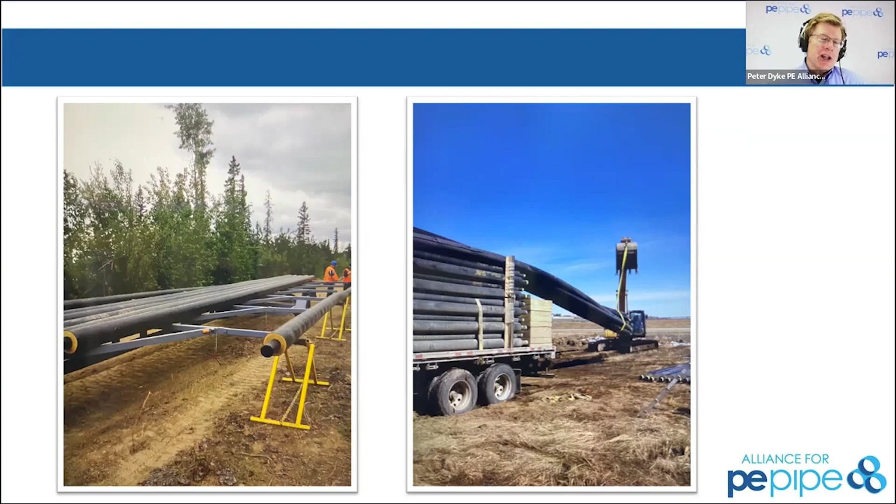So are you doing your own installations or bidding it all out? No, we do our own installations. 98% of our piping is put in-house. We did do a project last year where we contract out the directional drilling. Every now and then there'll be a DOT project that'll use HDPE, like we had an 18-inch river crossing of the Chena River. That's done by a contractor but overseen by us.

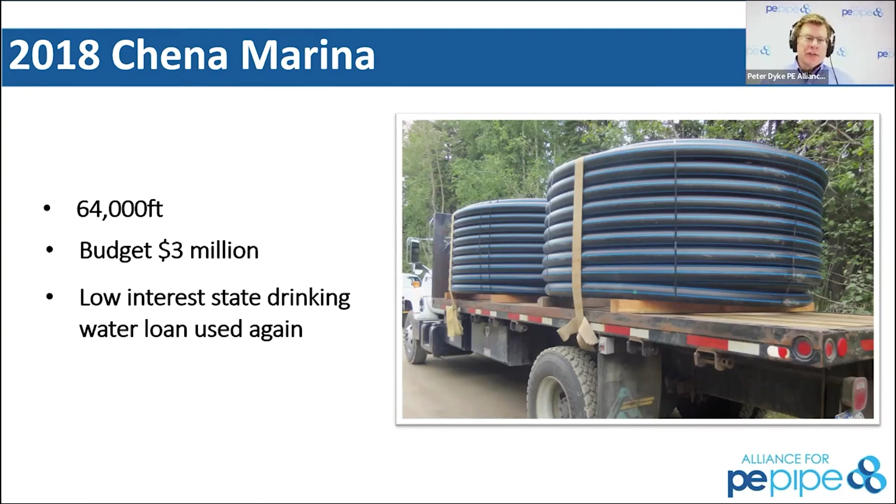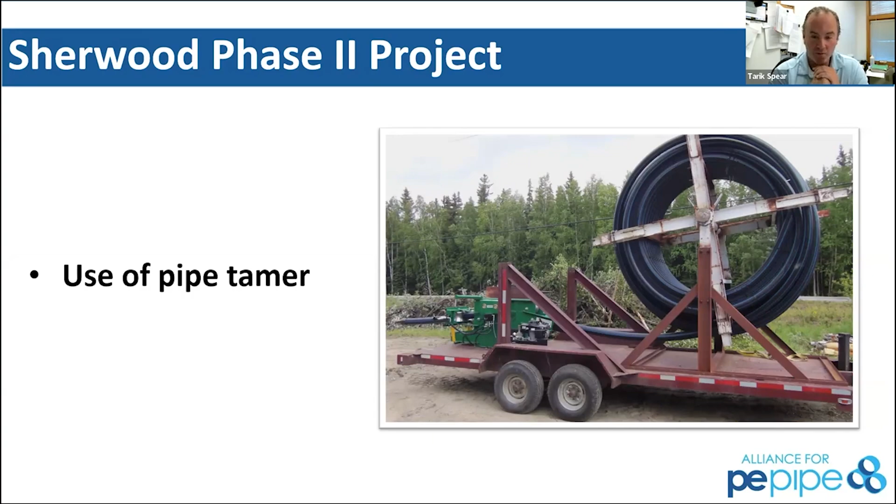And are you using electrofusion? We're using butt fusion and electrofusion, and have had absolutely phenomenal results with all of it. We've installed a 7,800 foot project, a 36,000 foot project, a 64,000 foot project, 4, 6 up to 18-inch main diameters, thousands of feet in sewer force mains now, lift station rehabs, and we've only ever had 2 leaks, and those were contractor damage.

So what kind of mistakes did the contractor make to get 2 failures? Well, probably not using a number 2 shovel more and relying on an excavator bucket to find our main. But so you don't have trouble with your electrofusion saddles?

No, now we did - our first pilot project, WL Plastics actually did a little case study on it, and we were using the electrofuse saddles at that time, and then fusing on poly valves. We got away from that after that project because it was too time consuming. We went to Romac saddles with a corp stop, then a swivel by flare adapter by plain end, so it doesn't require the generator or fusion machine to be there.

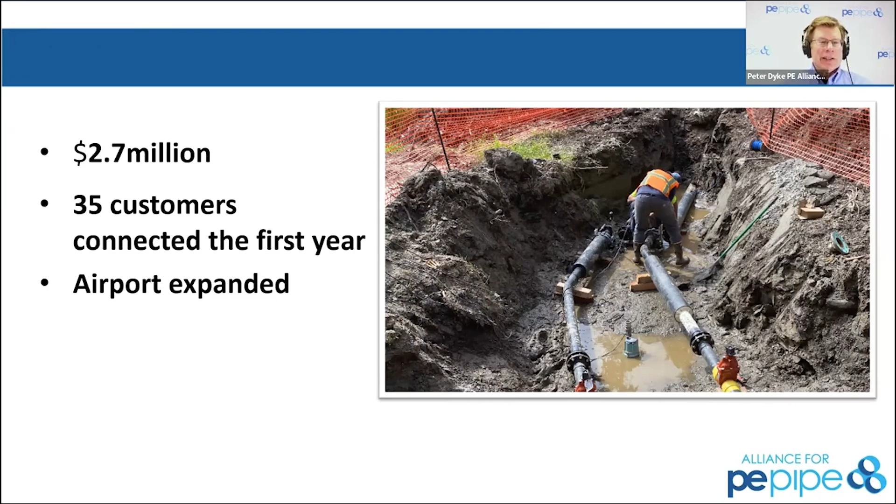Okay, so that's a mechanical connection with a corp stop that then connects to polyethylene, right? Correct. And we can have the spool all pre-built on a trailer, bring it down, tie on the swivel by flare adapters, and start rolling it out to the property. So at this time, there's no fusing done at the saddle connection - we can see that mechanical connection onto that polyethylene main, and then you've got the PEX warming coil that runs alongside it.

Parallel with the polyethylene that has been, and that's all electrofused, insulated in 3 inches of polyurethane foam.

We have hundreds of services out there now, and we've had 2 services freeze. In both cases, the customer thought they'd save money when they went on vacation and didn't turn their circ pump on. The thaw method worked perfectly. It takes very little time to circulate hot water through that PEX line and thaw out those 2 HDPE service lines, because all of our mains are circulated and the services have to be circulated too. When that water stops moving, it freezes.

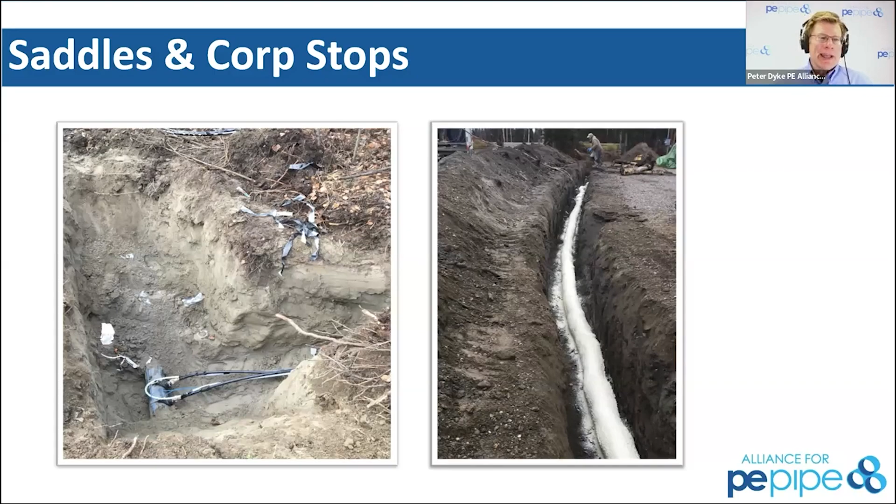Well, I love the fact that it's working, but I'd recommend not using a mechanical coupling, particularly within the frost line. Because after you retire, Tarik, that'll be the first thing to fail because it's mechanical touching the polyethylene. So I'd recommend to my audience, take the time to use electrofusion because it really does work and it's never going to fail on you. But I have seen what Tarik is doing throughout the United States because it's more expeditious. It works and it works for a period of time, but it won't last as long as the polyethylene.

Yeah, and the electrofuse - we were advised by the gas company here, in the beginning, during that first pilot project. I'm not sure if there's gas folks on here, but we were told to avoid electrofusion at all costs because if you're going to have a failure, that's where it's going to be.

Well, we've also done a lot of testing, and I'll tell you what, I firmly believe in the electrofuse couplings. I mean, we're doing 14-inch, 18-inch. We have had absolutely zero trouble with any of them.

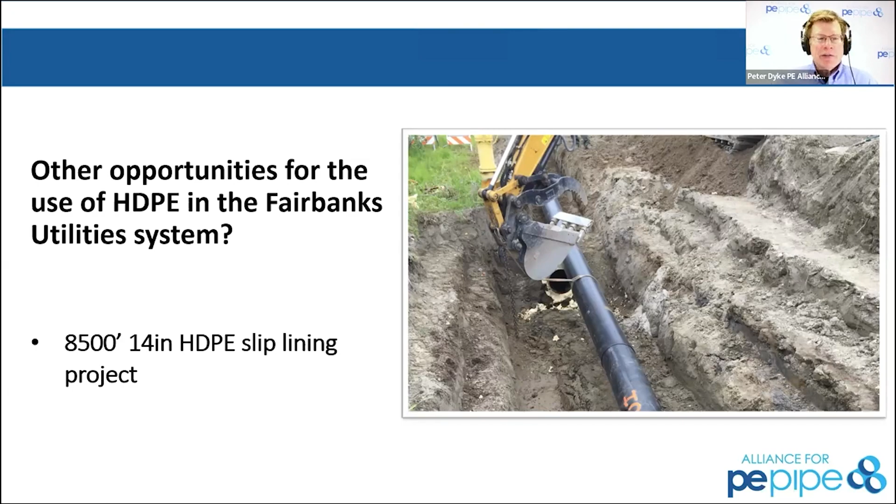So I love you telling that story. For our audience's benefit, what we've learned from utilities and municipalities like Tarik's that have adopted polyethylene in a major way is that if they do have failures, it's with an electrofusion saddle. Now, the gas industry has used more electrofusion than anybody else in the world, and they do it judiciously with proper procedures, and they rarely have failures. But when you compare a butt fusion to an electrofusion, in North America anyway, an electrofusion is initially more complicated because it has a couple additional steps. But in Europe, that's their primary fusion method versus butt fusion.

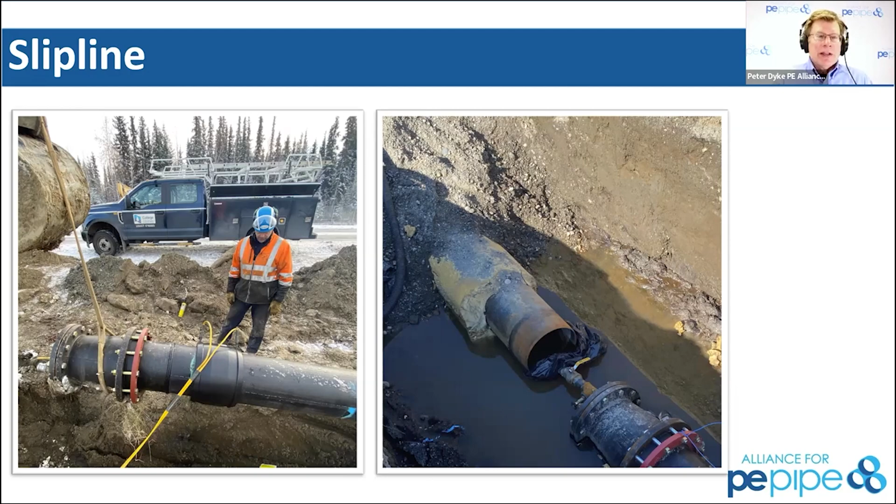So it's just kind of interesting, depends on where you come from. Now, Tarik, I want to respect my audience's time. One final comment, maybe on a thing that you wish you learned, but you did a fantastic job today. It makes me realize that we probably ought to do a case study webinar with you as one of our participants. Tarik, what else would you like to say today?

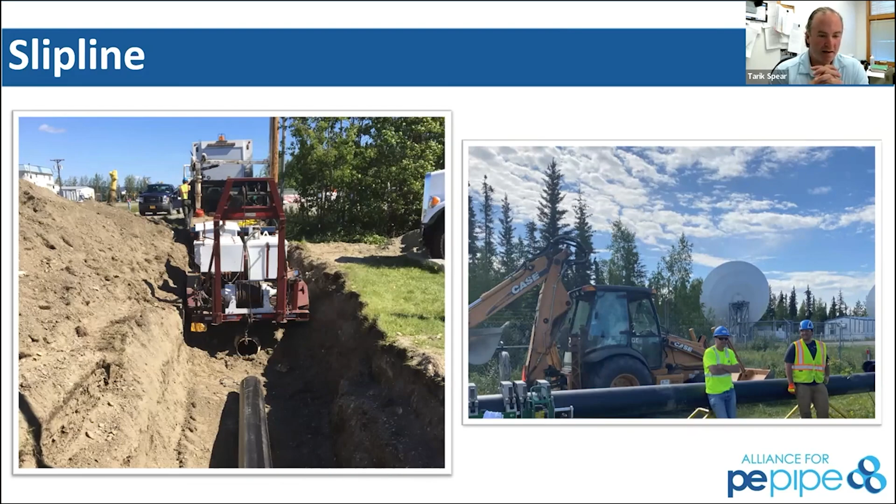It's going to save the company, it's going to save our ratepayers, it's going to save our investors for years. Yeah, well said.